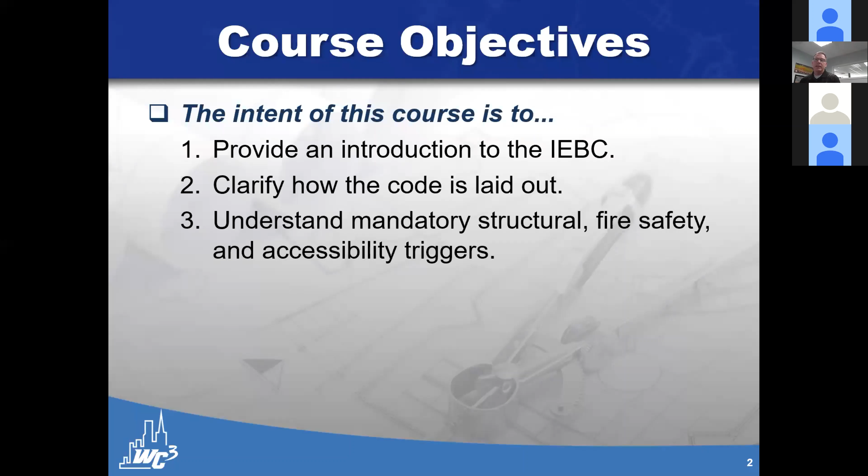There's a lot into fire safety. That even includes means of egress, and a lot of accessibility triggers. And I know Todd earlier today talked about accessibility requirements for existing buildings.

Okay, so we're going to go through 7 different topics if we have the opportunity to. We'll first do a brief introduction of the IEBC. Then we'll cover chapters 1 through 3, which are kind of the general chapters associated with all paths. Then we'll discuss the repair requirements of the code. We'll go into the prescriptive path, the work area path, and then the performance path outlined in the IEBC. And then we'll talk about relocated structures. That'll give you a really good feel for what's going on in the IEBC.

First of all, I have this picture. When you drive throughout the United States, you see a lot of older towns where the main street looks just like this. In general, these are not the ideal type of buildings that we would be building nowadays, right? Especially if you're in a high seismic region, where these are very heavy, brittle structures. If these are brick or unreinforced masonry construction, and now you have seismic ground motions, they're not going to react well to that. Or even in areas of high wind, when you have these tall brick parapets or things that might fall down on somebody in these heavy wind events.

Same thing with chimneys. So throughout the US, we have a lot of existing buildings that are really neat. We like to see them, we like to look at them, but in truth, a lot of them are dangerous. How can we keep these, but also make sure that it's not going to be too exorbitant for the owner? Where can we find a middle ground for life safety?

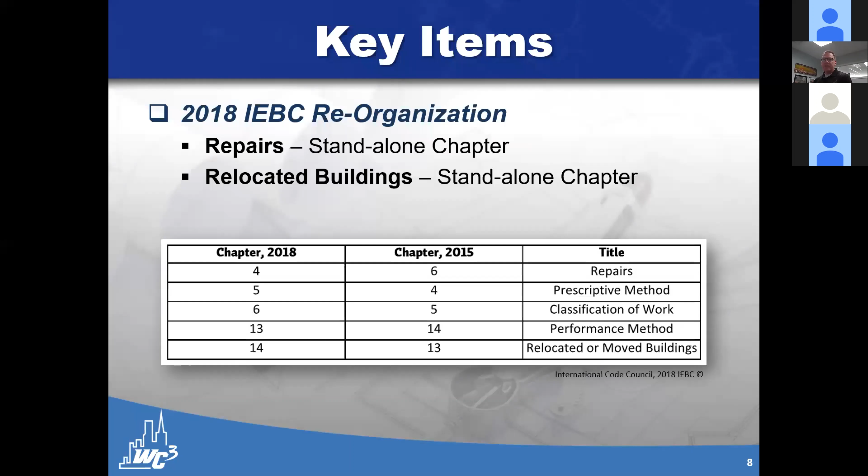I really like this. They give you an outline right away and tell you how it's broken out. Repairs is Chapter 4. The prescriptive path is in Chapter 5. Work area is Chapters 6 through 12, which is really the majority of the IEBC. Then you have the performance path in Chapter 13.

So I have a question here. It says, does the IEBC also pair with the IRC? Yes, it does. In fact, the problem with the IRC is right at the beginning of the residential code, it tells you that it applies to additions, alterations, or repairs made to a single family residence or townhouse. But it says you can't make it, you can't cause a dangerous condition or cause it to not be in compliance.

The problem with the residential code is it doesn't tell you what you can and can't do in relation to doing an addition so that you're not causing harm to that existing building, whereas the IEBC walks you through that. It tells you that if you're going to do this addition, you can't add any more than this amount of load to an existing element or something like that. So the IRC is supposed to be a standalone code, and you can use it if you're just doing additions or alterations to a residential building, but you may want to delve into the IEBC.

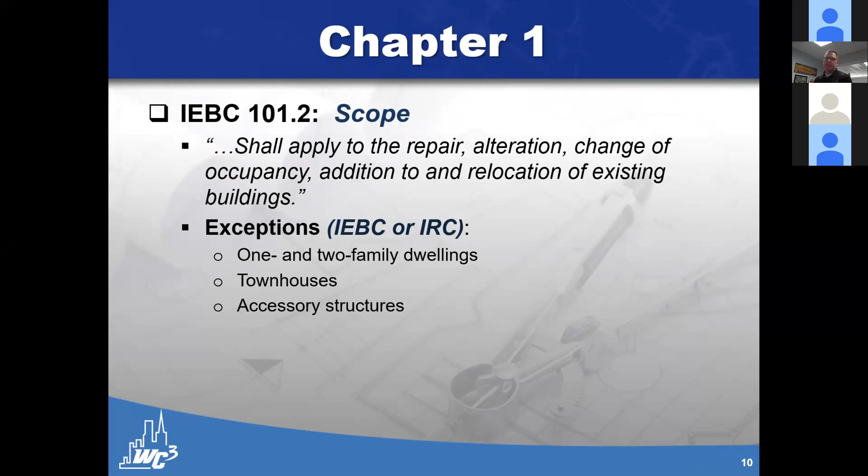Duties and powers of the building official. A couple of things are really important for us to understand: it's not new construction, these are existing buildings. All throughout the IEBC, it's going to talk about whether or not the building is located within a flood hazard area. This is one of those areas where if you have that 100-year storm event, or better said, a 1% chance of exceedance that floodwaters might come up to your floor area, wherever that base flood elevation is.

If you're going to flood that existing building at all during that 100-year event, you are located within a flood hazard area. If the work you're doing to this existing building constitutes a substantial improvement, the building official is the one that makes that determination, and they're the ones that can tell you. We're going to dig into that a little more, but it's a really important item with existing buildings. A lot of times they were allowed to build in certain areas, but now the flood hazard areas, our flood insurance rate maps have totally changed. What wasn't in the 100-year floodplain now is. So we really have to pay a lot of caution when we're dealing with existing buildings in flood areas.

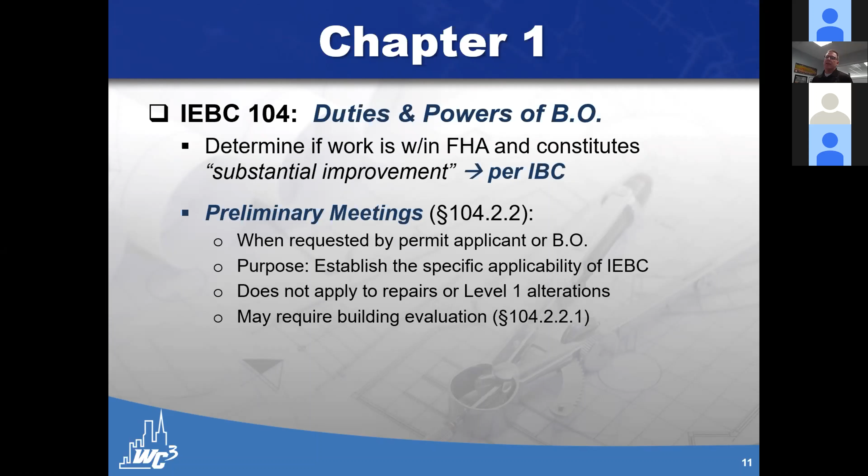Another thing they talk about is preliminary meetings. The IEBC highly recommends this, that you as a designer and the building official get together and discuss these projects before you submit to seek a permit, because they might give you other directions or things that could, hopefully not kill a project, but lead you in a different direction than you were initially planning. You wouldn't do that if you're doing a re-roof, but if you're doing a significant alteration, addition, or change of use to a building, you really may want to think about setting up a preliminary meeting.

Okay, then construction documents. The IBC has this, but we have a little bit different language in the IEBC we should think about. So the building code says that when we're dealing with construction documents, these are submittal documents consisting of construction documents - plans and specs, statement of special inspections, a geotechnical report, and other data shall be submitted.

Well, the IEBC is just a little different. It's still construction documents, but then it says special inspection and structural observation programs, investigation and evaluation reports and other data shall be submitted in 2 or more sets. So first, it adds the requirement of structural observations.

In the building code, structural observations are only typically required by the engineer of record when you have a very tall building, a high-rise, 75 feet or more, right? If you have a risk category 3 or a 4 building, or if it's something that the building official or somebody would require because it's a complicated building or whatnot.

Well, because we don't always know what we're getting into with existing buildings, the IEBC kind of recommends and encourages us to have structural observations done by the engineer of record on a project to ensure that those are constructed appropriately, that what they assumed is still what's found in the field.

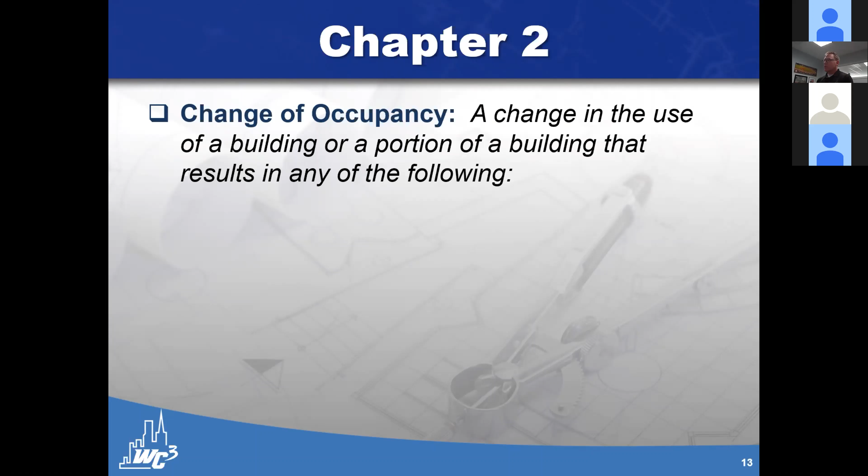So it's when you're going to change the use of a building, or just a portion of that building, that could result in one of the following. We're changing the occupancy classification - let's say it was an S2 storage, now we're going to an assembly A3 church. Now we're going to change from one group to another group in the same occupancy classification - so before it was an F2, and now I'm going to go to an F1, and F1 is a higher hazard.

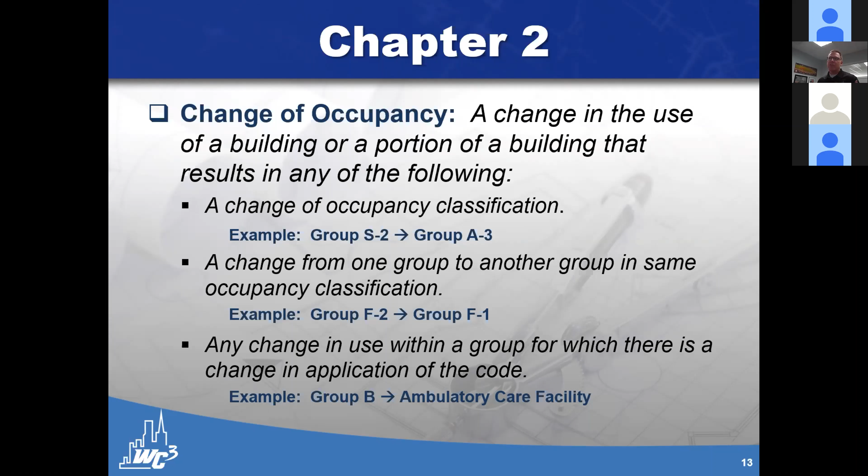Any change in use within a group for which there is a change in application of the code. Just an example, let's say I have a group B occupancy - well, it's going to be an ambulatory care facility. It still is a group B, but now there's a lot of other things in the code that could come into play. I'm thinking a lot of electrical provisions specifically that you're going to have to comply with for an ambulatory care that you wouldn't have to for a typical office building. So all of those could be a change of occupancy. It's just not going from an S to an A - it's within the same occupancy group, but a different classification, or even it could be its own classification if you have some additional code requirements that could come into play.

Flood hazard area, we already talked about this, our 100-year event. Substantial damage - this is a big one. So if the cost of restoring that building after a flood event exceeds 50% of the cost of that building before the damage occurred, then that's considered substantial damage. And they cannot simply repair it. They now need to make sure they're making that building comply with the flood provisions of either the IRC or the IBC - you know, getting up above the base flood elevation, other items, flood proofing, things like that.

Similar to substantial damage, there's the term substantial improvement. This is when the improvements you're making exceed 50% of the market value. That may cause you to bring an existing building up, raise it above the base flood elevation. Again, this is still related only if you're in a flood hazard area. There's a couple of exceptions - essentially they really limit, so you don't have to deal with a lot of finishes or things like that.

Very good question - how do you determine market value? It is totally up to the purview of the building official. That's why you may want to do one of these preliminary meetings. I believe FEMA has a substantial damage estimator, SDE, so if it's based on damage and not just improvement, you can use that. But really it's up to you to show the building official what you feel the value of the structure was before your improvement or before the damage, and then what the cost is of the work to be done. It's up to the building official to make the determination whether or not you've hit substantial, or 50%.

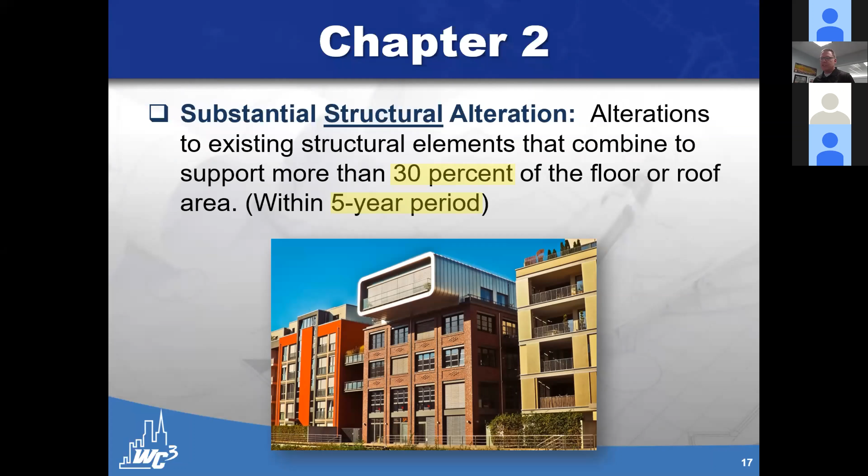Technically infeasible - this is one item I'm sure Todd talked about in accessibility earlier today. This is an accessibility trigger only, where it gets you exceptions, so you can get out of it. So if we have our bearing walls right here, if we have to meet a minimum egress width for our path of travel, now this bathroom that we have cannot be expanded anymore without significant hardship. So that's going to be technically infeasible to make that an accessible bathroom or to improve it to meet current accessibility provisions.

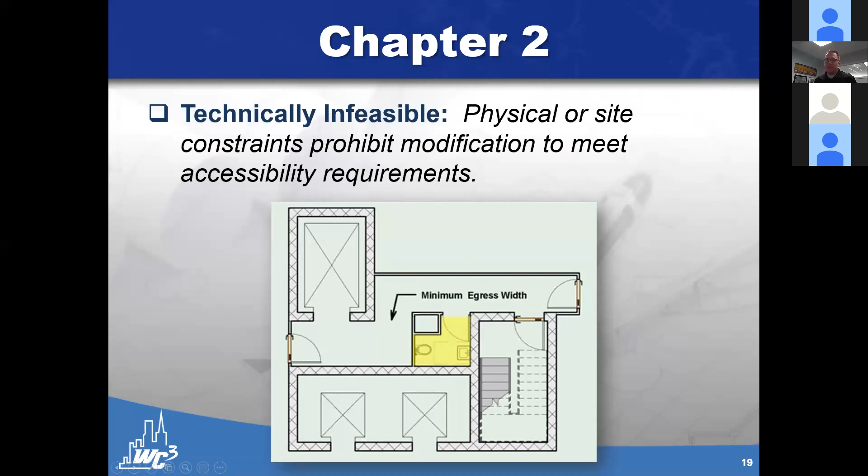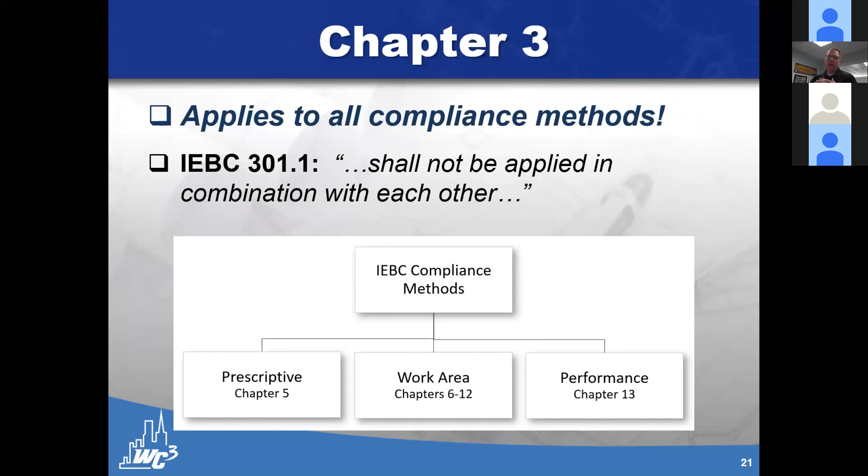Okay, chapter 3 - this applies to all of our compliance methods. We have the prescriptive in chapter 5, work area 6 through 12, and then performance chapter 13. You need to remember this: you cannot combine them together. You can't, as an architect, choose to follow the prescriptive path while the structural engineer of record follows the work area path, and then the mechanical guy wants to do the performance path. You all, as a design team, have to stick to the same path - you can't mix and match.

Anytime we're dealing with the International Existing Building Code, any dangerous conditions can be called out at any time by the building official and need to be remedied. I wish this was more clear - those of you familiar with the Uniform Code for Abatement of Dangerous Buildings that we used to have, that was much more clear in relation to dangerous conditions than the IEBC is. But the building official can cause them to be repaired at any time.

Similar to the IEBC being a companion code to the building code, it also says you need to make sure you're in compliance with the energy conservation code, the fire code. One thing for sure is the property maintenance code comes into play quite a bit and is referenced throughout the IEBC. And existing materials can always remain unless they are found to be unsafe. So if you have asbestos, lead-based paint, mercury, those sorts of things, and you're doing work within those areas, you're going to have to make sure you're meeting the health department and other EPA regulations to comply with that.

All new materials that you're going to be using in general should comply with the requirements for new construction, which is the building code. But sometimes like materials are allowed in the IEBC, so you can use like materials if that's all that's triggered, regardless of new construction requirements. All new structural elements that you're adding, and their connections, have to meet current requirements in the building code.

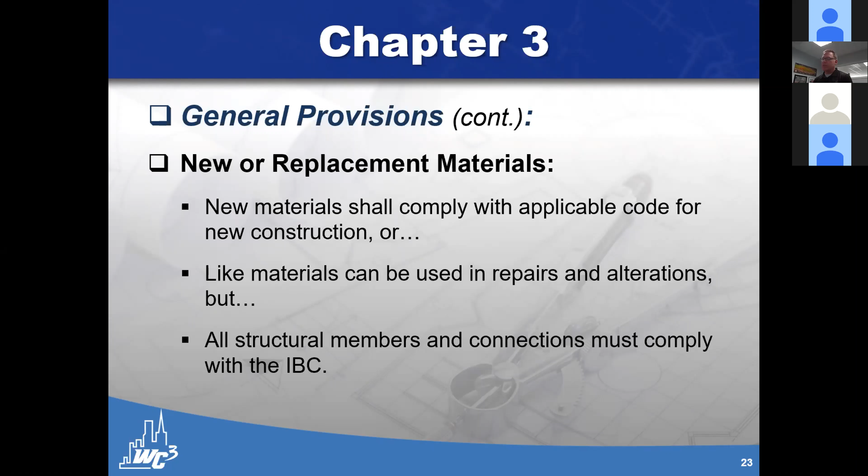303 is a really important section. This covers a lot of the triggers throughout the IEBC that address when you may require a structural evaluation. Remember the difference in Chapter 1 as far as construction documents to the building official when you're seeking a permit—a lot of times an evaluation report may be required. There are three different sections we're going to talk about on these structural evaluations: live loads, snow loads, and lateral or seismic.

As far as live loads, if you're going to do an alteration or an addition to an existing building, and the live loads do not change, you just need to make sure everything's in compliance with the loads during the original construction. Now if you're increasing the live loads, you need to show you're meeting the requirements of 1607 in the IBC. So if I take a residence and now make it into an office, before I had a live load of 40 pounds per square foot, now I have 50 pounds per square foot—I need to make sure that works. The third option is if it's a lesser live load, the building official can approve a lesser live load.

So why would you ever do that? Let's say I allow somebody to purchase a single family residence and convert it over to an insurance office. Let's say we know there's really not going to be more than 2 people in that office, plus maybe two clients—so 4 total people. I can see that it wouldn't really require an increase from the 40 PSF, and you could allow that as a building official. But if you allow it, then they need to placard that and note it.

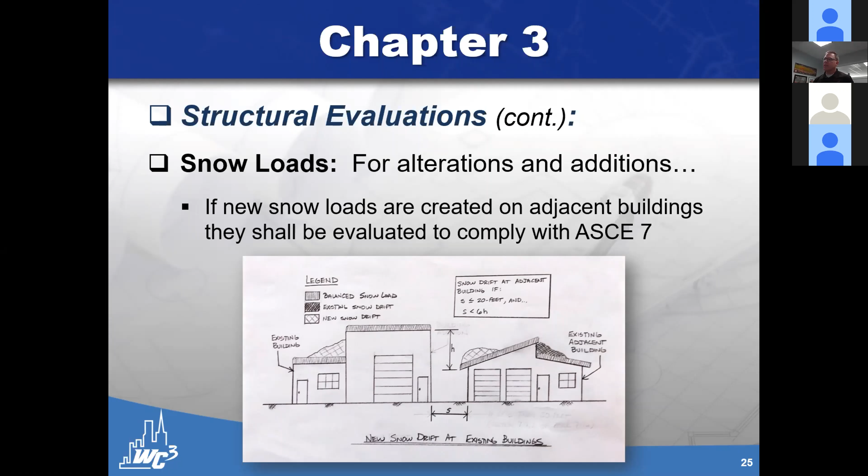So we may have to require an evaluation of the roof system of that adjacent property as well. That's highlighted and noted in the IEBC. Not a fun one, but hopefully you're dealing with more property and you're not built right up next to each other like that. Be aware of how additions can also affect snow requirements on that same building or adjacent properties.

Okay, seismic. This is a big one. This is where a lot of the triggers are in Nevada. You definitely have a lot of seismic considerations, and a lot of these triggers will come into play whether you're in northern Nevada or southern Nevada. You all have to deal with it.

Really, this is going to reference two different documents: the building code or ASCE 41, which is for the seismic evaluation and retrofit of existing buildings. That's what the structural engineer of record oftentimes will use if it's a pretty complicated existing building. Throughout the IEBC, they're going to tell you whether or not you have triggered a full seismic requirement or a reduced seismic.

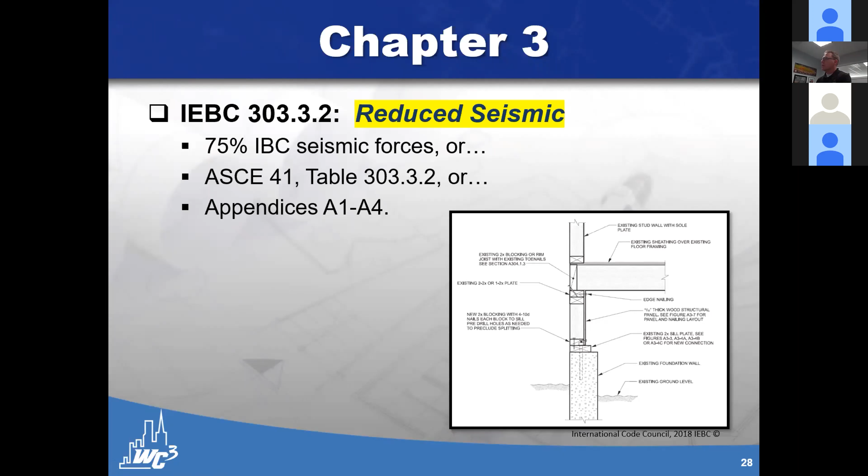All right, so that was the structural evaluations. Now, before accessibility - before the 2018 IEBC, all the accessibility provisions were mixed throughout. They were in the prescriptive path, they were in the work area path. They weren't in the performance path because it kicked you back to the IEBC for that requirement.

But now, in relation to existing buildings, accessibility is all covered in section 305. So that's probably, as you deal with existing buildings, a section you're going to want to tab. That's a section you're going to, as an architect, be referring to quite often - section 305 of the IEBC.

In general, it's requiring us to be in compliance with A117.1, the 2009 version. But it also has additional provisions for maintenance, change of occupancy, additions, alterations, and change in existing buildings. It has provisions for historic buildings. I know Todd went over some things today, but I'm not sure if he covered the IEBC references. Just as the IBC provides scoping provisions, we have revised scoping provisions for existing buildings within section 305.

First, let's assume for accessibility purposes we're dealing with a change of occupancy. For a change of use, we need to make sure we have an accessible building entrance, an accessible route from the entrance to our primary function area. Accessibility signage has to be provided throughout. Accessible parking and passenger loading zones have to be provided, and we have to have an accessible route from that accessible parking to our accessible entrance.

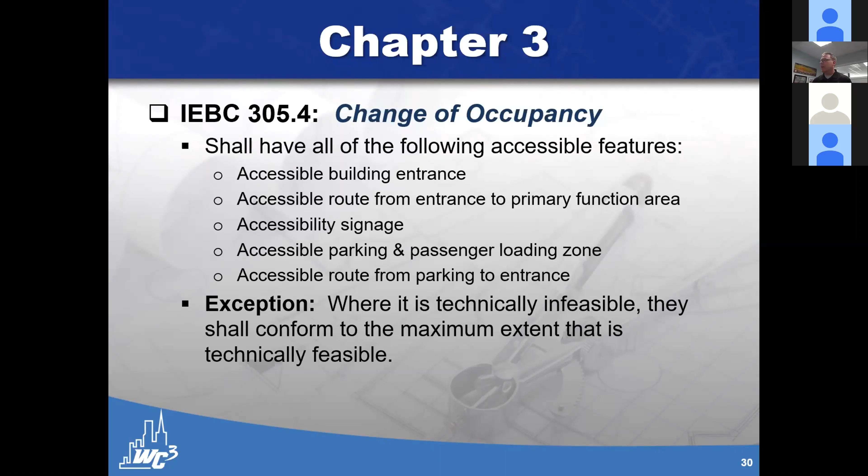Things like that. Now additions are a little different. The addition itself, obviously I would hope, has to comply with the accessibility provisions of the IBC, so new construction requirements for the addition. Now if our addition actually alters part of our primary function area, then we're going to have to also make sure we're providing accessibility to those primary function areas.

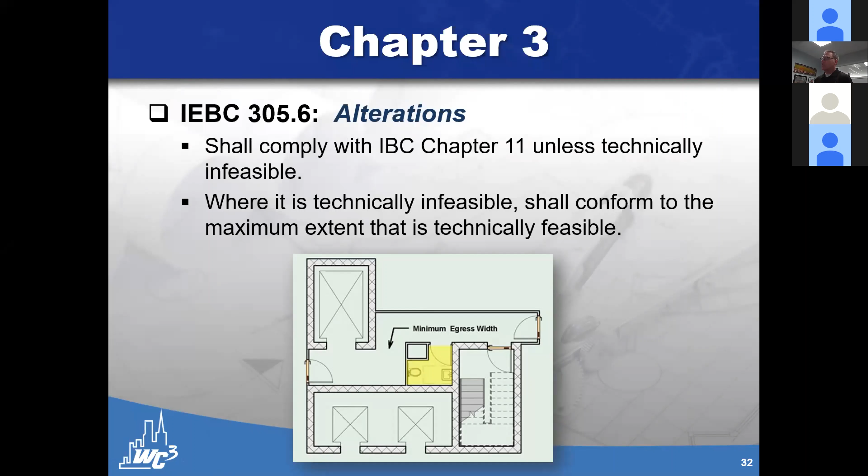Alterations need to comply with Chapter 11 for the work, unless it is technically infeasible. So we get that definition back in, and if it is technically infeasible, we still have to comply to the fullest extent possible. Now when we're dealing with our primary function area, if we have an addition or alteration that is affecting our primary function areas within the existing space of a building, we need to make sure we have an accessible route to that primary function area. And with that accessible route, we also need to make sure we have proper accessible toilet facilities and drinking fountains. That's only if our alteration or addition affects primary function areas within the existing space.

I did hear Todd mention earlier the 20% cost. Just so you know, that 20% trigger, this exception, is only limited to the primary function area items you have. If you're doing a change of use, the only trigger you have is technically infeasible - you can't pull out the 20% cost burden. That only applies to additions or alterations where you have to make sure you have an accessible route to the primary function areas. In that case, you can pull out this 20% cost of the alterations.

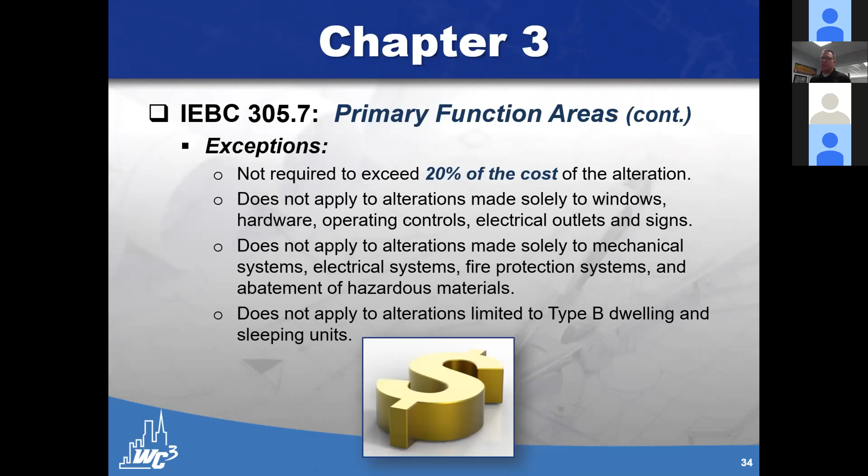There's a lot of scoping provisions provided throughout 305 - items for entrances, elevators, all these different items, amusement rides. We can't go into them all. Just know that they're typically a little less stringent than what you would have in the IBC for new construction, but if you have any of those elements, you do have to comply.

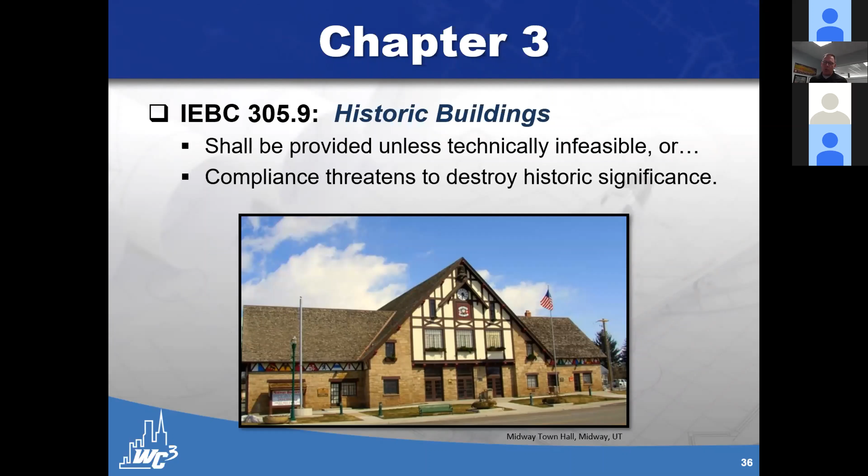Now in relation to historic buildings, in general they say you need to provide accessibility unless it's technically infeasible, or if you can show that the compliance threatens to destroy the historic fabric of that building. This is the general rule - now, this is from the ADAG website, but a couple of things you're supposed to have: at least one accessible route from an arrival point to an accessible entrance. This looks like the main entrance. The main entrance does not have to be accessible for a historic building.

So this one they make accessible, and we have to have an accessible route to that entrance. You have to have at least one toilet room - it could be a family assisted toilet room. So those are really the accessibility provisions they have for historic buildings in 305.9.

Okay, so now let's move on. We went over the general provisions. Let's dig into repairs - again, this has its own chapter now, this is Chapter 4 of the IEBC. You don't get to follow prescriptive work area or any of that. You have to deal with repairs in Chapter 4.

You cannot make any building less conforming if substantial damage did occur and you're in a flood hazard area. You need to make sure that building is brought up above the base flood elevation. You're designing it to comply with the requirements for the IBC or the IRC.

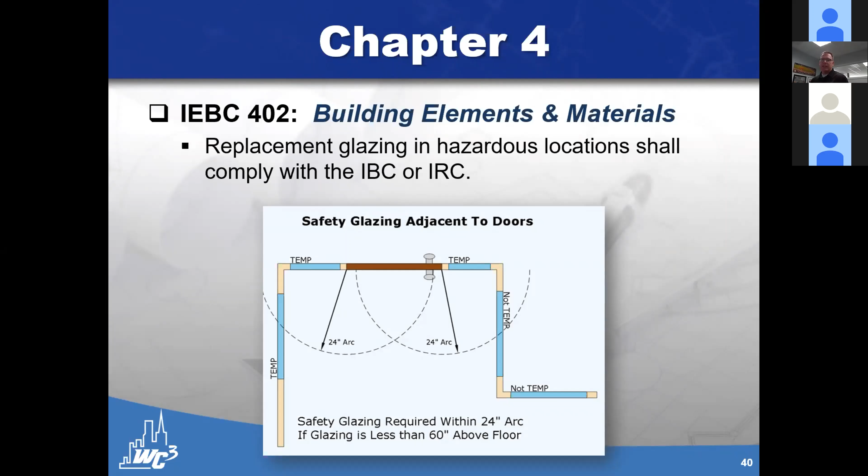Anytime you're going to replace glazing, and that glazing is located within a hazardous location, most of you are aware of where that might be, near wet surfaces, next to doors, things like that. We need to make sure we have the appropriate glazing in those hazardous locations, not replacing in kind.

In relation to structural repairs, as long as the damage that occurred that you're repairing is less than substantial, you can repair it to its pre-damage state.

Now, if it's substantial structural damage, which we already defined, and it's very significant - that was the one where we talked about 2 gravity triggers or our lateral trigger - they need to give us an evaluation, considering all of this, but it can be reduced seismic when they do their evaluation.

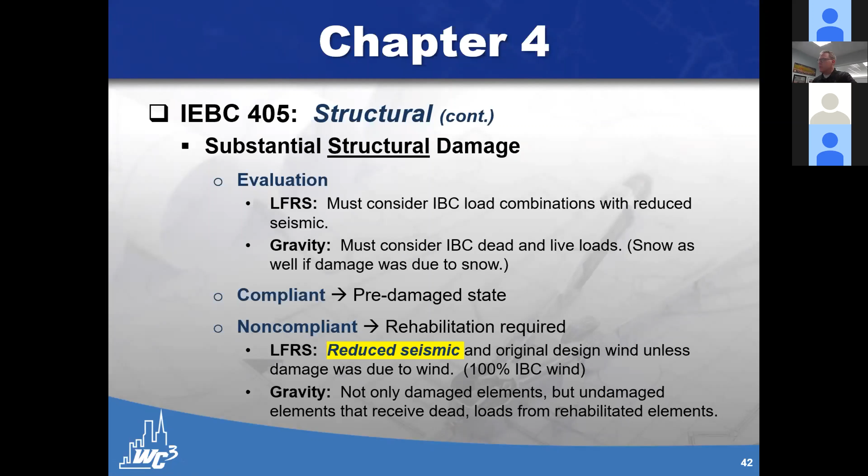If their evaluation shows that it is a compliant building, they can then restore it to its pre-damage state. If they show that it's non-compliant, they're going to have to upgrade the building to make sure it's able to withstand 100% wind, the reduced seismic, 75% IBC seismic, all the gravity loads, things like that.

Again, we already talked about the flood hazard area, so I'll skip that. Other things when we're doing repairs, there's just a couple of electrical items we should be aware of.

You can, in general, replace with like material, but receptacles have to comply with 406 of the electric code. Grounding type, GFCI, AFCI, tamper resistant - those types of receptacles need to be installed. And if they have the Edison base type plug fuses, if you can see any tampering or overfusing that's done, they need to replace those fuses.

If you're in an I2 occupancy and it has non-hospital grade receptacles, they all need to be upgraded to hospital grade receptacles. And if we have appliances that aren't grounded, we need to make sure that we somehow are able to ground those elements.

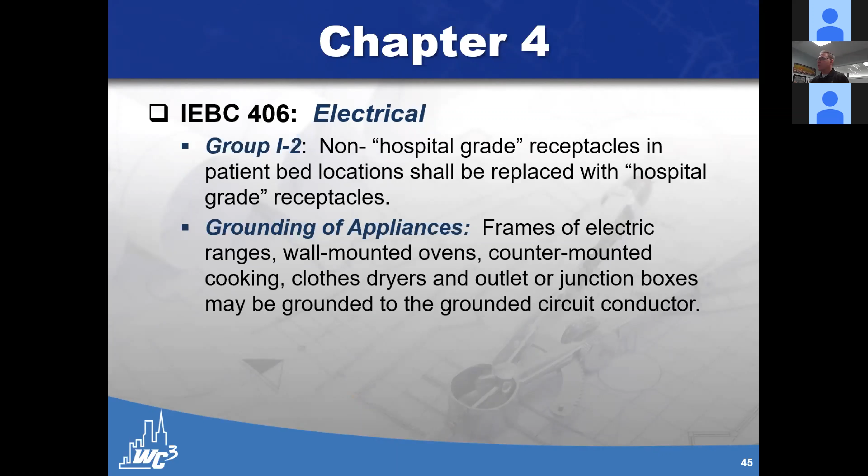Mechanical draft systems is the main thing that really comes into play here. If you're going to install one, you need to make sure it's listed. It needs to have visible, audible warning provided, smoke detection, battery backup - those sorts of things need to be provided with that. So if you're going to add a gas fireplace within a master bedroom or something that wasn't there before, you need to make sure these items are addressed.

In relation to plumbing, it's really no big deal. You just have to make sure you can replace with like kind materials as long as they're not prohibited by the plumbing code. And when you're going to replace a toilet or a water closet, you need to make sure it's an efficiency toilet, which pretty well they all are now - it's hard to get one that doesn't meet these code provisions.

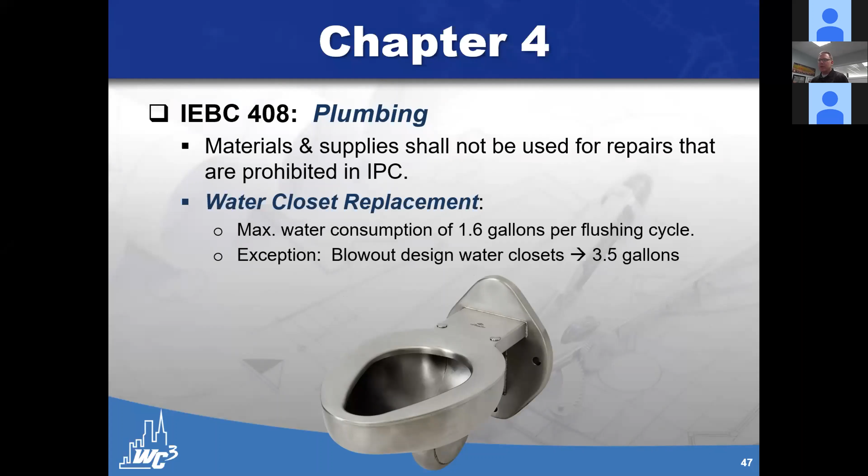Okay, so that's just the repair section. It's pretty easy. Now, the prescriptive path - this is what I've always called the Betty Crocker, the cookbook. This is the one that really walks us through what we used to know.

Most of us have been in this industry for a while. We were very familiar with Chapter 34 of the Building Code. Now, really, that is gone - that was taken out, 2012 was the last year. And those provisions really are what we have now in Chapter 5 of the IEBC. It's very, very similar.

The one thing about this is there are some exceptions. Bleachers and grandstands need to follow a separate standard created by ICC. Again, we can't mix our paths once we're following this. We need to stick to prescriptive all the way through.

If we're going to do an addition to an existing building, the addition itself has to comply with the building code, we've talked about that. Alterations to the existing building need to make sure that the existing building is no less in compliance than it was prior to that addition. Sometimes, from a structural perspective, if you do an addition, it may cause a reentrant corner or a structural irregularity, and that needs to be addressed. So that's really what they're after there.

You need to make sure that this addition, combined with the existing portion of the building, has not exceeded your allowable heights, area, and story provisions of Chapter 5 in the building code.

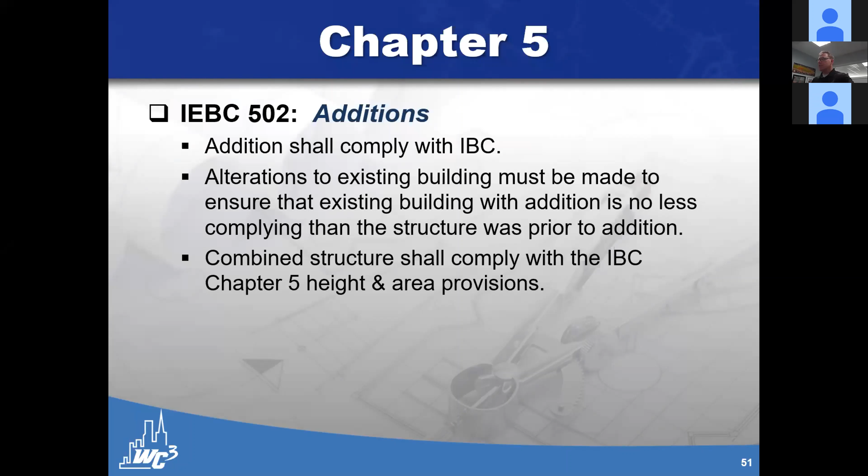Whoops, I was on the wrong picture showing that to you guys, I apologize, I have 3 screens going and it was on the wrong screen. So if it's less than substantial, just the addition needs to be raised. If it is substantial, now the existing building and the addition need to be raised to be above the base flood elevation. Sorry about that.

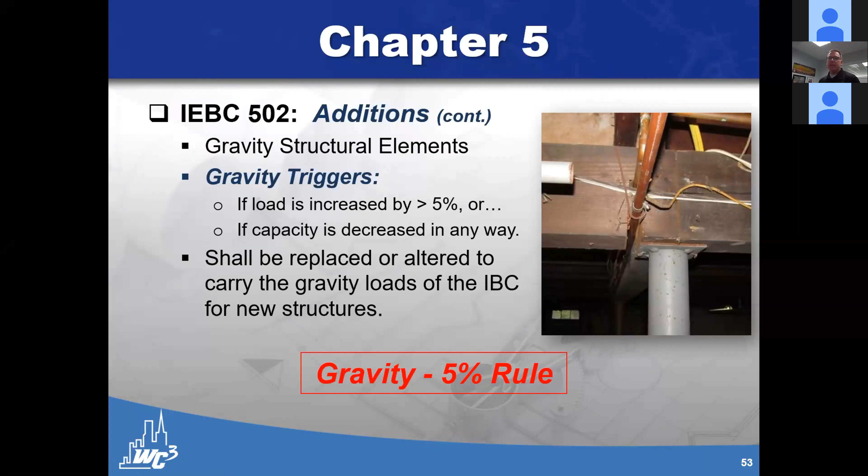For gravity, it's the 5% rule. In general, am I adding more than 5% load to an existing gravity element, or have I decreased its capacity in any way? I hope you would all know that somebody came through here and definitely decreased the capacity of this element, all right? So that needs to be either altered, replaced, or repaired to make sure it can meet and support the current building code load criteria.

The lateral trigger is 10%. So if you're going to be attaching this addition to the existing building, sometimes we don't, sometimes we have a gap between them. But if you're going to be attaching them, you cannot increase more than 10% lateral load to that element, or decrease its capacity by 10%. So the lateral is a 10% rule, the gravity is a 5% rule.

Now the 5% rule is associated with just that gravity element, but the 10% rule is for the building as a whole. Once you've triggered this requirement, you can't just, let's say I cut out a lot of a shear wall, I can't just strengthen that shear wall. I now have to evaluate the entire building.

The reason that trigger is there is it allows the opportunity for the building official to make sure these buildings are safe. This trigger, if you hit the 10% rule lateral for doing an addition, it's full seismic, 100% IBC, as we talked about in 303 of the IEBC.

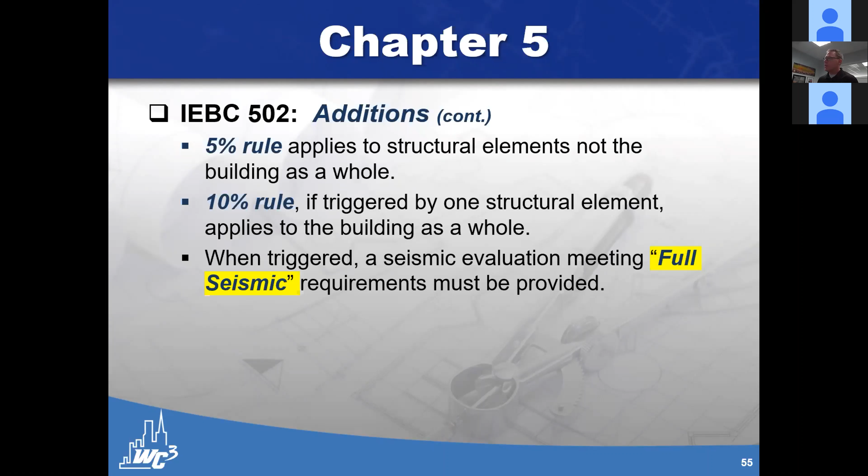Here's the way out. Let's say you have an existing building, it's unreinforced masonry, we have 2 wythes of brick, rubble foundation. It would have cost too much to upgrade it all. So we have a seismic gap between the two, eccentric footing, and so we just tell them this is now designed to meet 100% code requirements. We tell the owner, you feel any shaking, run to the addition, and that's what you do. But that is an allowance. If you can make the addition structurally independent, then you haven't triggered a requirement to upgrade the existing building.

This is just to go over it a little bit. Here we have an existing building. What they're going to do is an addition, they want to add a kitchen and then a covered patio. So now I have this new roof area, and I take half of that and take it over here.

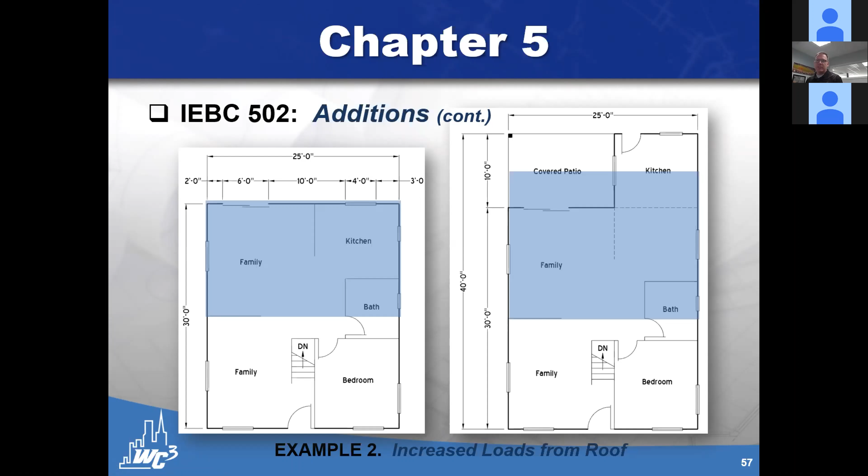So this bearing wall right here is now supporting more than 10%, right? Or if it's bearing, let's say gravity, 5%, but now let's call it a shear wall. More than that, I've also decreased its capacity by taking out a lot of the wall. Even though I had a window here, I took out some additional portion of that wall. I definitely hit the 5% gravity, the 10% lateral triggers. They need to do an evaluation of this entire building and show that it meets code.

Okay, prescriptive requirements. Hopefully we're all familiar with this. Anytime we're touching anything in most R or I occupancies, we may have to add smoke alarms and CO detection, required throughout group R or I1, and we need to locate them just like the fire code or building code requires.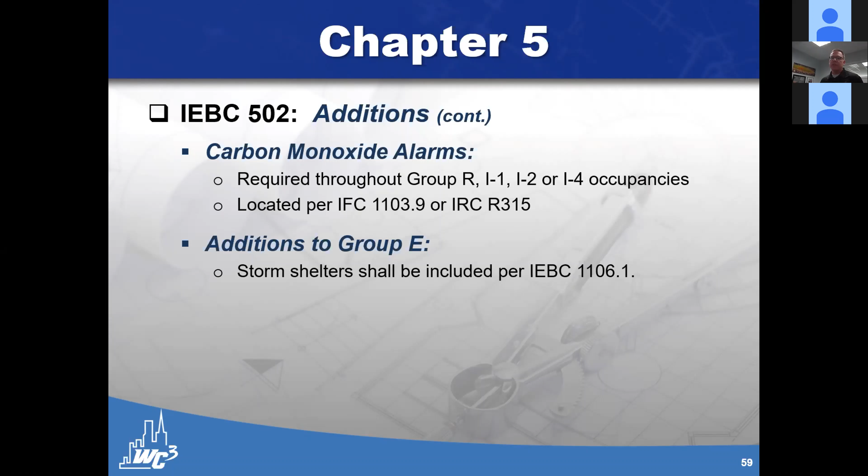Same thing with carbon monoxide detection - these apply to group R, I1, I2, and I4 occupancies. There's also a requirement in section 502 that if we have storm shelters, and we're doing an addition to a group E occupancy within an area that requires storm shelters, you need to show the existing storm shelter can handle the additional occupancy from the addition, or add a new storm shelter compliant with the building code requirements.

Okay, we have a question. So a high-rise building, over 20 floors, from the 1960s, with horizontal corridors and vertical shaft pressurization - is compliance triggered when going from transient hotel to permanent apartment?

You are changing it - going from an R1 to an R2. There's the requirement: the building official has the opportunity to state whether or not it's the same or a less hazardous occupancy in your change of use. If that's the case, a lot of the change of use triggers may not be required, but it's up to the building official to make that call. It gives the building official a lot of leeway.

So the trick is to show in your analysis, and have a preliminary meeting, to say 'we are making this less or the same level of hazard as it was previously in this change of occupancy.' In that case they might not require it, or maybe there'd be a meet-the-halfway sort of thing. That's in the change of occupancy section we'll get to, and they leave it up to the building official to meet that exception - if the change of occupancy is equal or less hazardous. That's a good question.

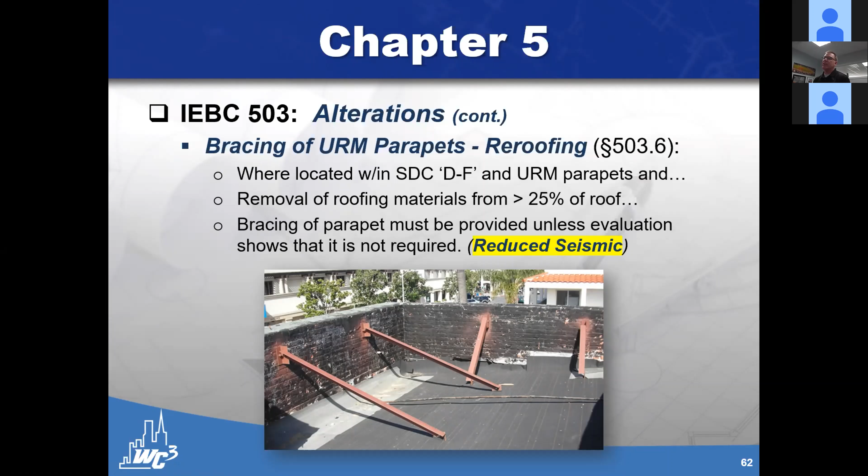If we have unreinforced masonry parapets, and you're going to be doing a re-roof at all, it requires you to brace the parapets. It does say reduced seismic - that evaluation by the engineer of record is just 75% of the IBC forces. Also, if we have a reinforced masonry or reinforced concrete building with a flexible diaphragm or wood diaphragm, they also need to evaluate the roof to wall anchorage.

As an example, one reason for this is the older tilt-ups done in the 70s - the roof-to-wall attachment was highly inadequate, and during the Northridge earthquake they found a lot of them collapsed. So that roof-to-wall connection is key to collapse prevention and holding a building together and letting people get out.

So they have this trigger: if you're going to be altering at least 50% of the area within that existing building, and it's composed of concrete or masonry walls with a wood diaphragm, then they need to evaluate the roof-to-wall connections and make sure they meet the 75% reduced seismic force level.

Similarly, if we have unreinforced masonry buildings in seismic design category C or above, and 50% of the area is being affected, they'll have to evaluate that - maybe not add the connections, but evaluate the roof to wall connections. Even if you're not doing a re-roof, if you're affecting at least 50% of the area of an existing building as part of your alteration, they require bracing of the unreinforced masonry parapets.

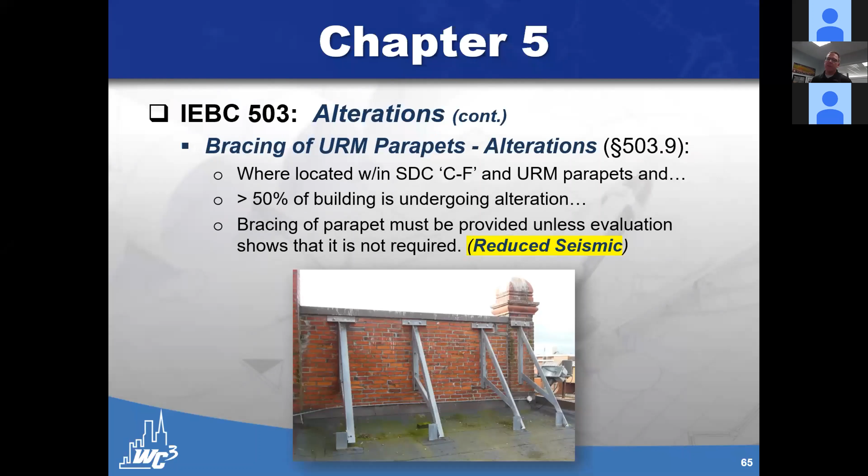A lot of times we'll see these older buildings - a lot of older school buildings have this where they're concrete frame buildings with masonry infill walls. Now there's this requirement that the masonry infill has to either be removed or reinforced to meet the reduced seismic.

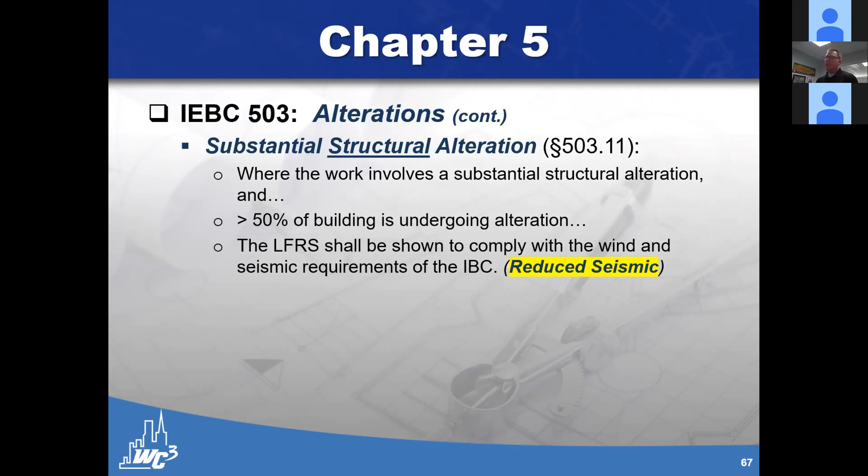Substantial structural alterations, again, that's one of the triggers we talked about earlier. Just so you know, anytime we're doing an alteration, if it triggers a seismic evaluation per 303 of the IEBC, it's always reduced seismic. If we're doing an addition and have to do an evaluation, it's always to full seismic. So additions are 100% IBC force level, while alterations are just 75%.

It's not just seismic that's covered in the existing building code, it's also wind. If you're in areas with high wind, greater than 115 miles per hour design wind speed, and you're going to replace at least 50% of your roofing materials, they require you to evaluate the diaphragm and the roof to wall connections of those buildings. Make sure you're at least meeting 75% of the wind requirements of the building code, and if not, you need to strengthen all your diaphragm connections and roof to wall connections.

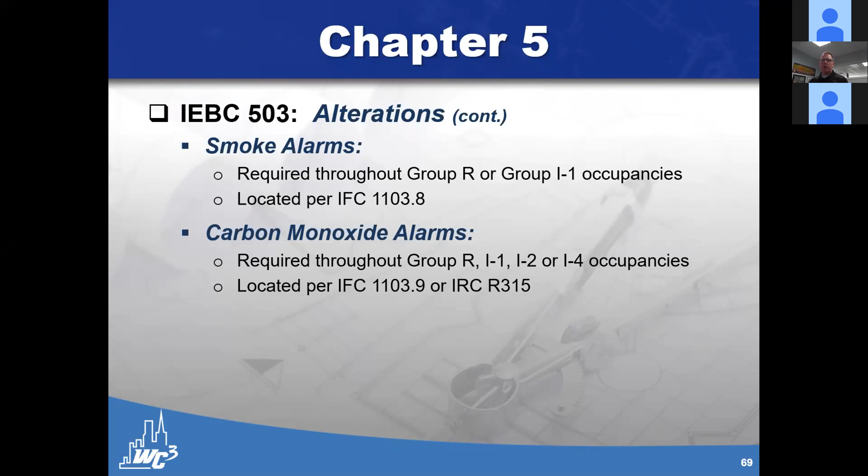Just like in repairs, we have requirements here. If we're doing alterations in a group R or I1, we need to add smoke alarms. In R, I1, I2, I4, we need to add carbon monoxide alarms. Another thing noted here is if you have existing refuge areas, any alterations you're doing need to make sure you're not affecting them so they won't comply with the requirements for smoke compartments in I1, I2, I3, ambulatory care facilities, and horizontal exits. You need to make sure they still satisfy the requirements for those uses.

Fire escapes. Obviously, this is something we do not have in the building code for new construction, but in a lot of our areas, in older Las Vegas and older Reno, you might find some older tall buildings that did have fire escapes for exits. So the IEBC addresses fire escapes and how we handle them, not the building code itself. They are not allowed in new construction, but we may still have them for existing construction, and we need to make sure we're meeting minimum criteria. The IEBC highlights some of that.

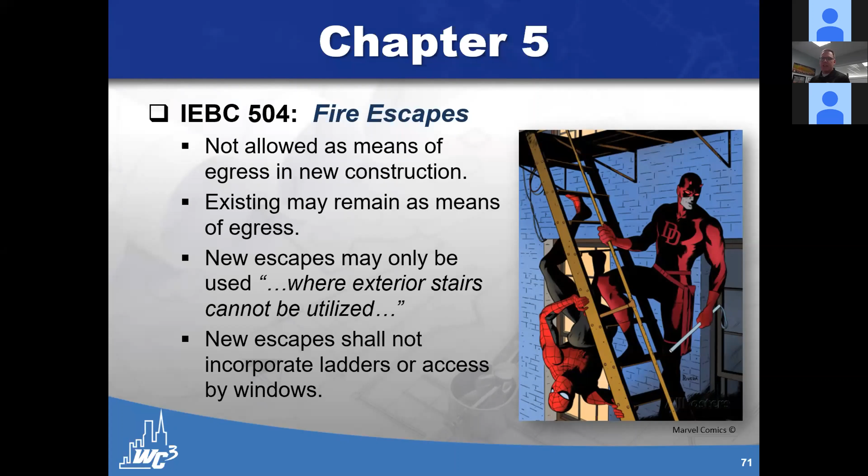And if you're doing a change of occupancy for an existing building, and you now need to have two exits, or maybe one additional exit at least from what you have available, this allows you to incorporate new fire escapes into it as part of that change of occupancy, so long as you're not exceeding 50% of your required exits being from a fire escape. There's a lot of provisions, and you can dig into it more if you want to. We won't spend much time on it here.

Now, our emergency escape and rescue openings. A lot of changes occurred in the 2018 codes you guys might be aware of, but right now there's some things I want to highlight for existing buildings. For sure, our opening control devices at our upper story windows. If it's an operable window, if the top of the sill is less than 36 inches from the floor, and the distance to grade is 72 inches or more, we need to make sure we have an opening control device that won't allow anything to pass through more than 4 inches.

Now, our replacement rescue openings. If it's an R2 or R3, it says they're exempt from the IBC or IRC requirements, provided that the replacement window is the largest size that can fit in the existing opening, and it provides for an equal or greater window opening area.

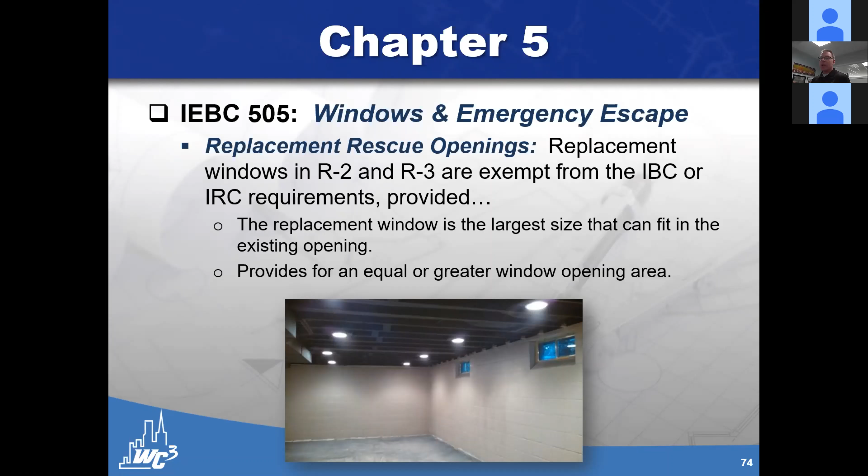I bring this up, my wife grew up and she had a basement room with windows just like this. If this was an existing space used as a bedroom, then this would apply. If now we're doing a change of occupancy within that space and altering it to be occupied as a bedroom, we do need to alter these windows to comply with the IBC or IRC requirements. Unless we meet another exception now that's there, that if you have 2 other exits out of the basement, then you may not have to have the emergency escape and rescue opening from that room itself. So that's a new provision. Not quite sure why it's there, but it's there.

Okay, now prescriptive, we're still in the prescriptive path, chapter 5, change of occupancy. So no change can happen unless that building is shown to comply with the IEBC. And this is what I was talking about before, the second bullet point. It's up to the building official to note whether or not that occupancy is the same or less hazardous from a fire and life safety risk perspective.

So it's really up to them, and it's up to you to provide that argument early on in the process. So less hazardous, and I think you could definitely say that, going from an R1 to an R2 in the scenario we talked about before.

Anytime we have a change of occupancy, the building official has to issue a certificate of occupancy. Stairs are not required to comply with the requirements of the IBC where the existing space and construction does not allow a reduction in pitch or slope. So it's kind of going back to our accessibility technically infeasible term or definition.

When we hit our triggers for a change of occupancy, it makes us go to full seismic. Live loads have to conform with the IBC. Snow and wind loads, if you haven't changed anything, you're good.

If we go to a different risk category—let's say before it was a warehouse and now it's going to be a church—now we've made it a risk category 3 building in all likelihood. We now need to show in our evaluation as part of that change of occupancy that we meet all snow, wind, and seismic requirements to show that they meet the full IBC requirements.

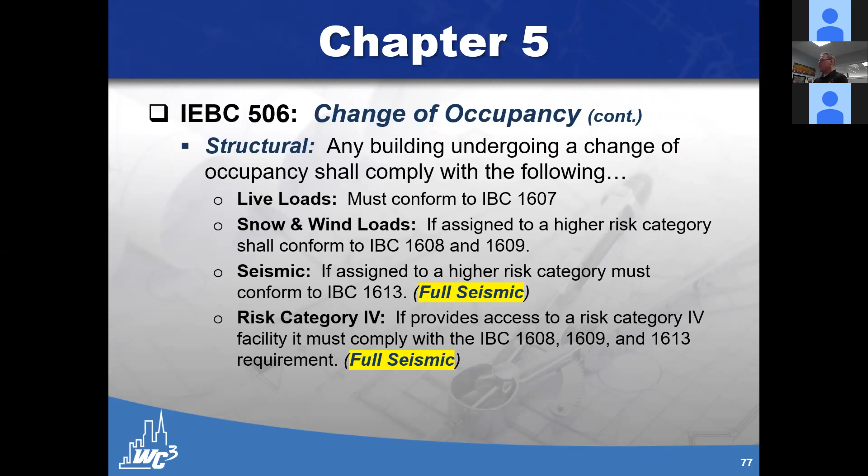Historic buildings, following the prescriptive approach, are not required to meet the provisions of this, provided that the building official deems there's not a distinct life safety risk.

I will highlight right now, again, there's three paths you can go. The way the prescriptive path addresses historic buildings, I do not like at all as a code official, because it puts all the onus on the code official. Whereas if we go into the work area path, which we'll talk about in a little bit, it actually requires...

...the design team and the owner to put together an evaluation of that historic building to note what items they are not in conformance with from a life safety perspective, why those items may not be able to be addressed in order to keep the historic fabric of the building, and then there's supposed to be a meeting of the minds with the building official. In this instance, the code doesn't really say that you have to have this evaluation with the design team and discuss it. I really like the evaluation.

So, okay, that's the prescriptive path. We went over all that. We've gone over repairs, we've gone over the prescriptive approach, and now let's talk about the work area method. Again, this is chapters 6 through 12. I'm going to probably be skipping some slides a lot because there's a lot of repetition from the prescriptive path.

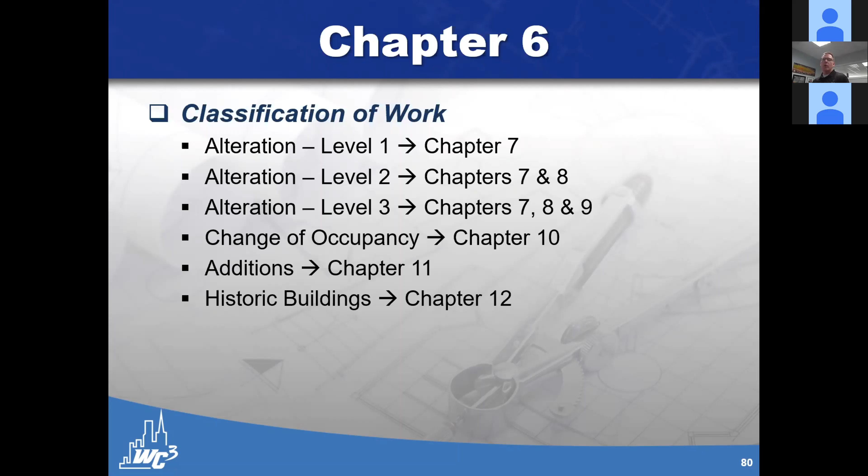Right away, chapter 6 just tells you how they break it out: chapter 7 will talk about alteration level 1, chapter 8 level 2 alterations, chapter 9 level 3 alterations. They just break it out. In general, alterations are given different categories.

A level 1 alteration is if we're going to remove or replace any existing equipment, add a new roof covering, replace the roof, or a re-roof permit—really, really minor items.

Alteration level 2, now we're going to start to reconfigure the space a bit. We might cut some new door openings or window openings, add some equipment rather than replace existing equipment—we're going to add equipment now.

Level 3 is a lot bigger. Not only are we reconfiguring the space, we're probably reconfiguring 50% or more of the entire building there, the aggregate building area. So chapter 7, we're doing level 1 alterations, probably a lot of re-roof stuff.

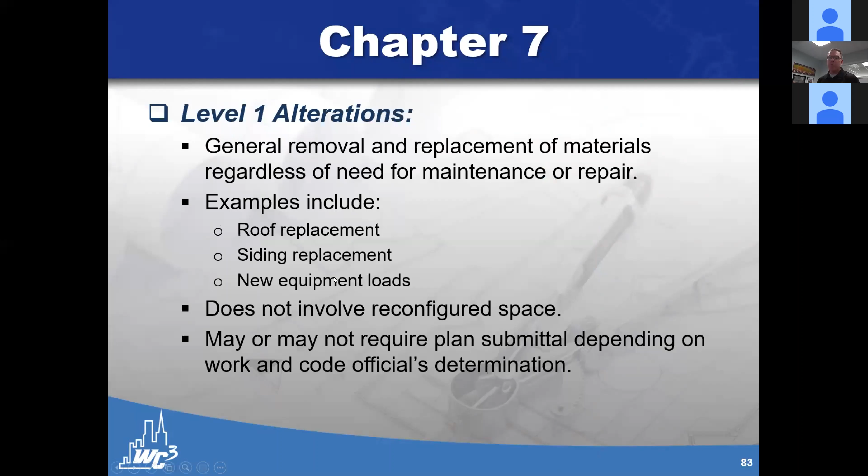So roof replacement, siding—my slide says new equipment loads, but that's not the case, it's replacement equipment, not new. So we shouldn't be seeing things like this, right?

It goes through all the requirements we have in the building code, that depending upon the type of materials, how many layers of roofing we can have. A roof replacement per the IEBC means we're replacing all the existing layers of roofing—we're down to the roof deck.

A roof recover is we're now going to be putting new roofing materials over existing roofing materials. They allow you in the IEBC to do that as long as the new roofing is installed per the manufacturer requirements—you have a complete and separate roofing system that does not rely on the existing roof for support.

So a standing seam metal roof could do that. There's specific provisions for metal panel or concrete clay tile that are installed over shake roofs, and that's just to make sure that we're not creating a fire hazard there. So 705.4 of the IEBC discusses that.

Also, there's a new protective roof coating sometimes that you can apply, even if you're following all of these. If it's a soaked roof, if you have dangerous materials, things like that, you should not be doing a roof recover.

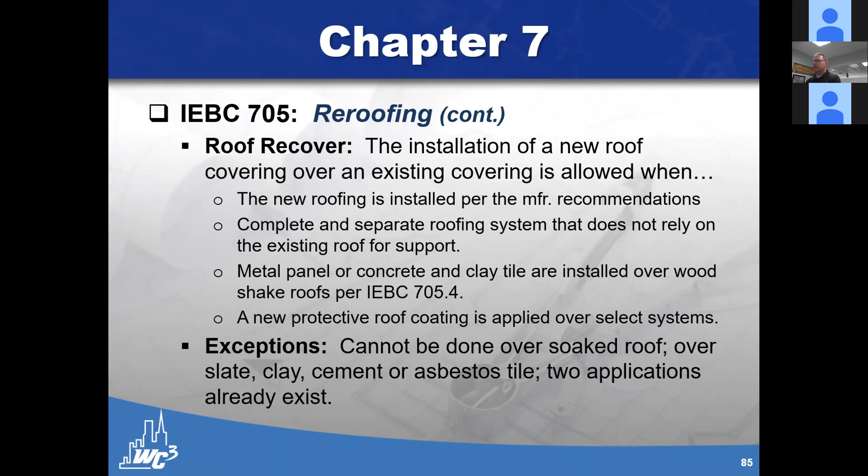One thing I didn't say there, just know that with the re-roof, some of the triggers we talked about under the prescriptive still apply. We may have to have our URM parapet bracing. We may need to, in high wind regions, reinforce or evaluate our roof diaphragm and roof to wall connections.

Now, level 2 alterations are going to be getting a little more involved. We're going to now reconfigure the space. Once it's a level 2, we have to comply with Chapter 7 and Chapter 8, both together, okay?

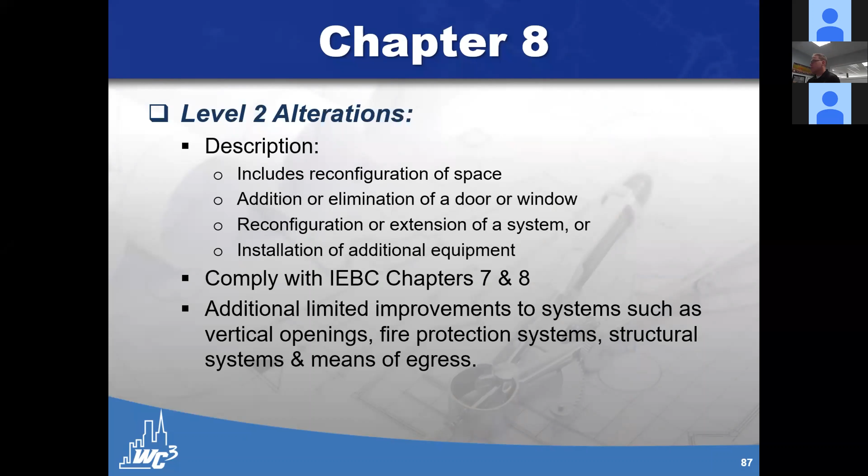There are some requirements they have for vertical openings, fire protection systems, things like that come into play with this. So your existing vertical openings - I'm going to first freak you out a little bit. Existing openings connecting 2 or more floor levels shall be enclosed with 1 hour fire rated construction.

With that said, with the code, we always have exceptions, and there's 14 exceptions, and a lot of times you can get out of this. That's really the general default that they want you to do, and it's up to you to determine whether or not you meet one of those 14 exceptions.

If you're affecting a work area of greater than 50%, it really should be a level 3 alteration. And enclosure requirements for the vertical openings, it does definitely come into play.

Smoke compartments. So when we're dealing with I2 occupancies, if you have more than 30 patients on a story, you have to make sure you're dividing it into no less than 2 compartments by means of smoke barriers.

Guards - you have to make sure you're providing guards at every area where you have a 30-inch drop or more. Existing guards are fine even if they're not in compliance height-wise, but if they're structurally unsound, if they're going to fail pretty shortly, then you do need to replace those guards. And once you replace them, you need to make sure they're in compliance with current code provisions.

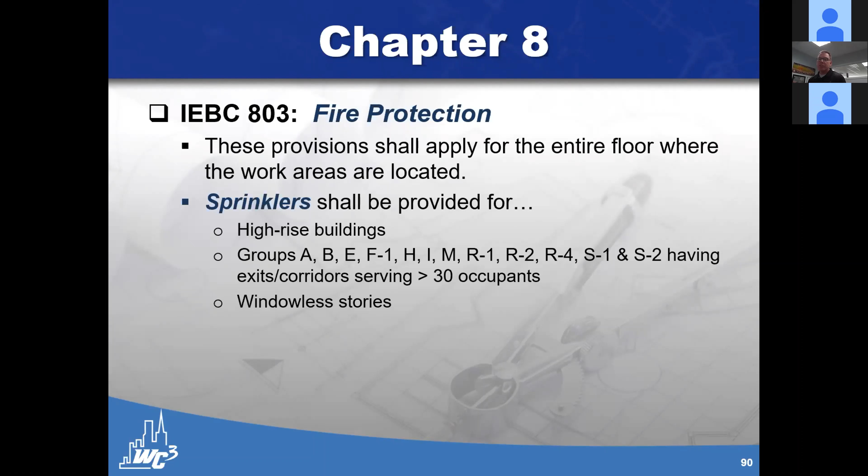If you're a group A, B, all of these, and you have exits or corridors that are serving greater than 30 occupants, we need to make sure we have sprinkler protection. If we have windowless stories, we need to make sure we have sprinkler protection.

Now, standpipes - whereas the building code tells us we need to have standpipes within all new buildings that have an occupiable floor level that's 30 feet or more above the lowest level of fire department access, the IEBC says 50 feet. So we have an occupiable floor of 50 feet above the lowest level of fire department access.

So if it does not have an existing standpipe system, we need to add it if we have floors above 50 feet. Those standpipe connections now need to be provided at each level. They have to be installed in accordance with the IBC and of course, the IFC, which is a duplicate.

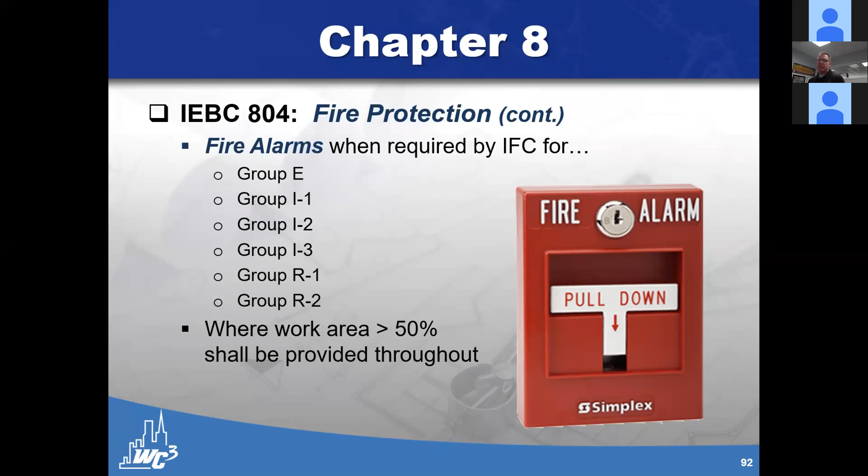Fire alarms. So anytime the fire code would require them for a group E, I1, I2, I3, R1, or R2 occupancy, we need to now provide them for these existing buildings that we're performing level 2 alterations in. If you are affecting a work area of greater than 50%, that fire alarm system now has to occupy the entire floor level.

Okay, fire protection systems - so we're still in that. Smoke alarms have to be provided throughout our R and our I1, carbon monoxide alarms in our R's and our I1, I2, I4. Same as what we've talked about before under the prescriptive approach and the repairs.

Means of egress. This only gets triggered when you're dealing with 2 occupants, 2 tenants or more within the work area that you are altering. So it only applies to that work area. There are some times that you might trigger some things within 805 that would require you now to do the entire floor area as well.

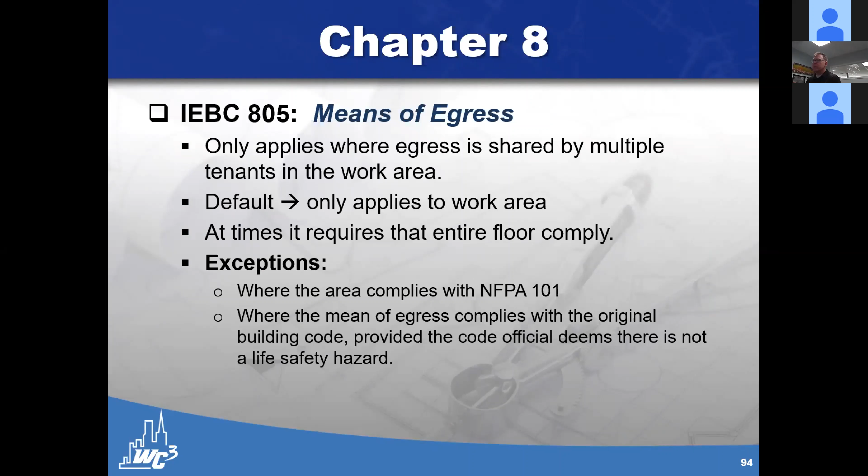Number of exits have to comply with the IBC, but when there's more than one tenant, and based on the occupants you have, they'll go through and tell you whether or not you can get by with one exit. It's going to be a little different than the provisions that we have.

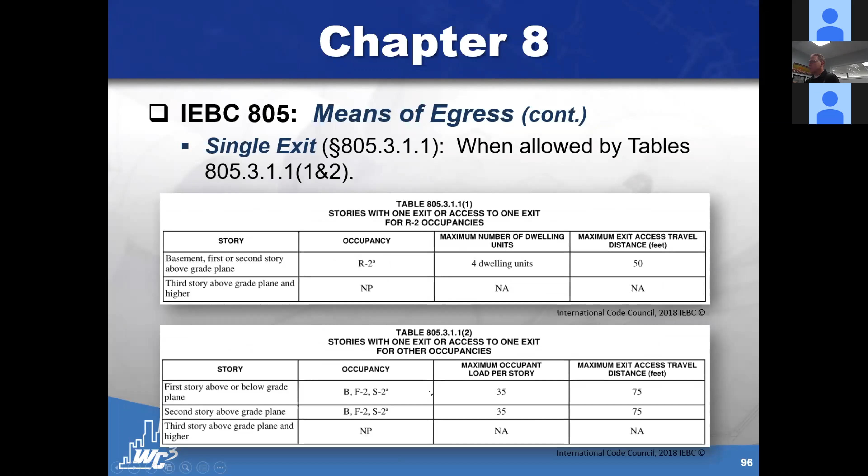Now these are the provisions that they also include in the IEBC. So for an R2 occupancy, we have B, F2, and S2. They're a little less stringent than what we'd have in the IBC requirements.

Fire escapes, we already discussed fire escapes and what that is. New fire escapes can be installed.

Mezzanines. Now we have a lot of new mezzanine provisions in both the building code and the IEBC. Two exits are required when you have more than 50 occupants on that mezzanine level, or the travel distance exceeds 75 feet.

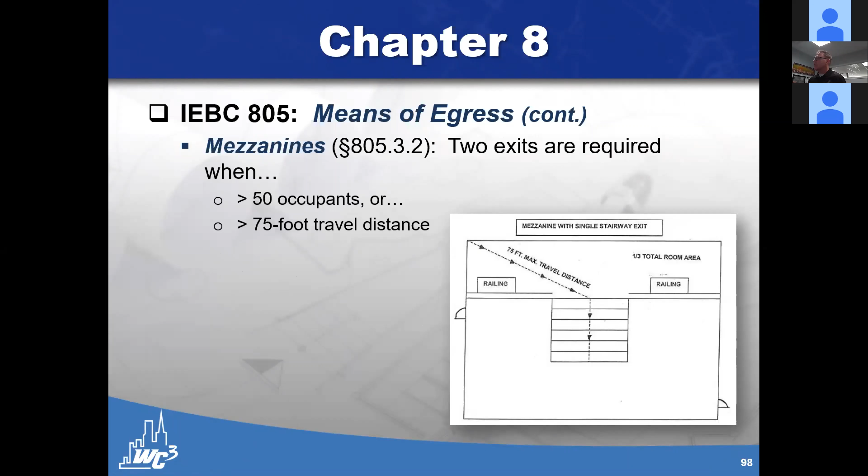Or if we have a group A with our main entrance, when you're serving an occupant load of 300 or more, that main entrance must be capable of serving at least half of the occupant load. I think we all understand that - that's what people are most comfortable with and where they're most likely to return to, so 50%.

Our egress doorways - at least two are required if you have greater than 50 occupants or greater than 75-foot travel distance. And in our I2 patient sleeping rooms where the suites are greater than 1,000 square feet, your door swing, door closing, panic hardware, all that has to comply with the building code requirements.

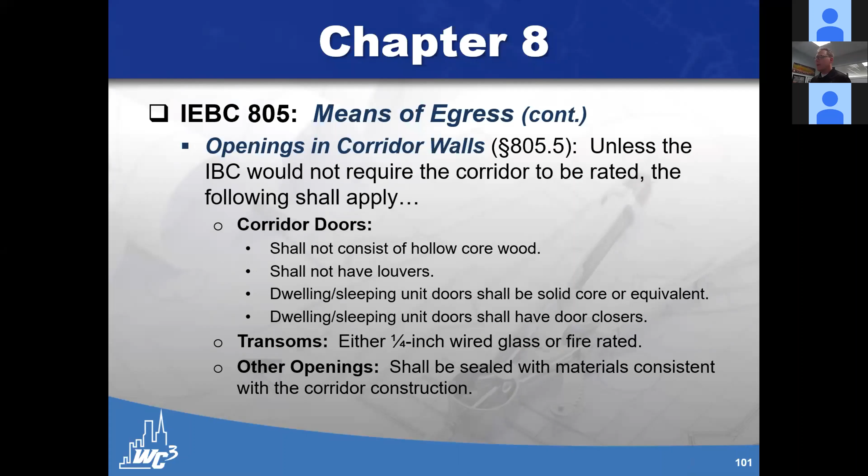Now, if we have existing openings in corridor walls, unless the IBC would not require that corridor to be rated, we need to make sure those penetrations, those openings, are compliant. So corridor doors cannot consist of hollow core, cannot have louvers or transoms. You have to make sure we have appropriate fire rating, and any other openings need to be sealed and meet all the penetration limitations in Chapter 7 of the IBC.

Means of egress lighting has to be provided. If it's greater than 50% of the floor area, you have to do it throughout that entire floor level. Artificial lighting has to be provided per the IBC. Dead end corridors cannot exceed 35 feet.

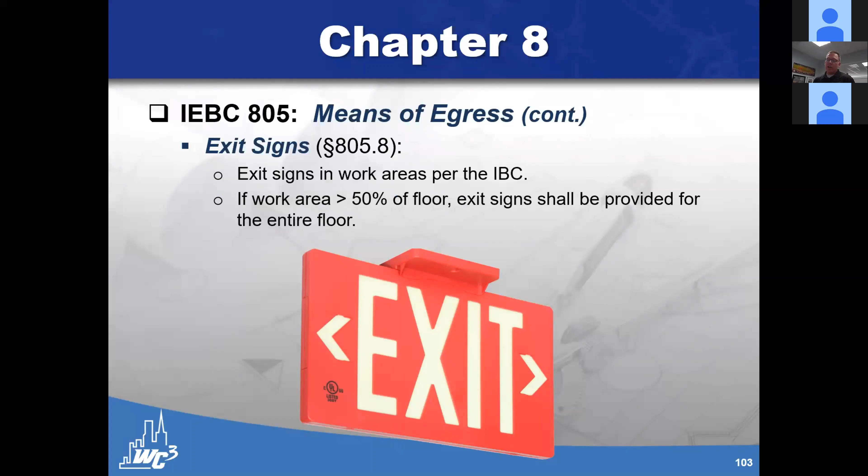Now exit signs - we want to make sure exit signs are being provided throughout the space that we are altering, wherever the IBC would require them. And if we're altering more than 50% of the floor, that entire floor level needs them.

Handrails will have to be provided - anytime you have greater than 2 risers, one handrail has to be provided. If it's greater than 66 inches in width, you need one on each side. Guards - we already went over guards, the exact same provisions there. An existing guard can remain unless it's structurally inadequate.

Okay, electrical, this is a big one. New installations all have to meet the current NEC provisions. If you're doing wiring within an A1, A2, A5, H, or I occupancy, they have to be upgraded to current NEC provisions. If it's an R2, R3, or R4, they also need to meet the provisions of 807.3 - receptacle requirements for GFCI, arc fault protection, things like that. So those have to be met as well.

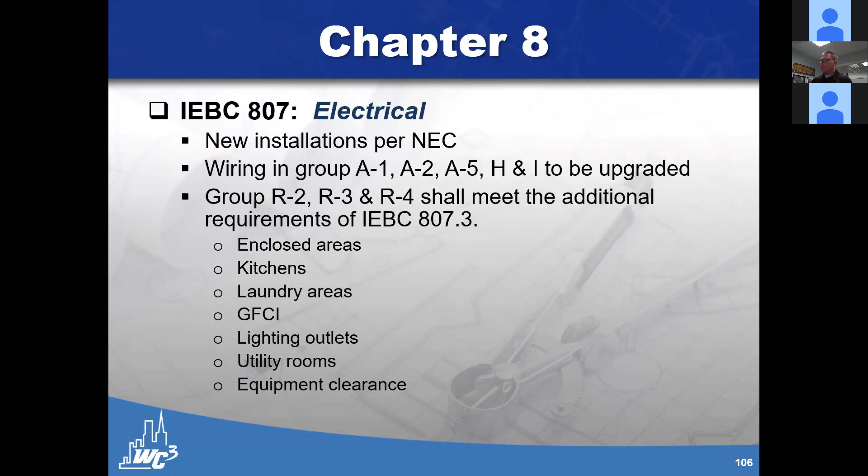So level 2 alterations, mechanical: we just need to make sure we have natural or mechanical ventilation that meets the requirements of the mechanical code. Here I'm referencing the IMC - I know I've already done that in the past, and I know throughout most of Nevada you're using the UMC and the UPC.

The only time plumbing comes into play is if that alteration may cause an increase in the occupant load of more than 20%. If it's more than 20%, you need to show that all the plumbing meets the requirements of the adopted plumbing code.

Energy - the alterations only, not the entire building, have to meet the energy conservation requirements.

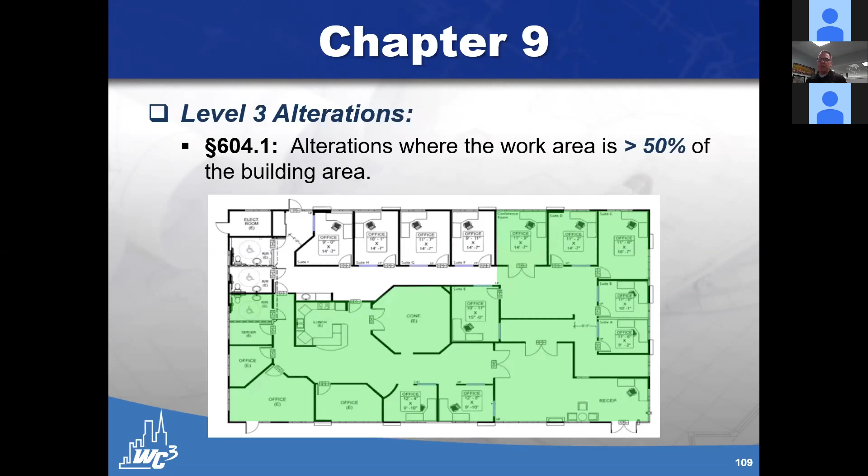Okay, level 3 alterations. So we're gutting this building, doing a lot of work, right? It has to be more than 50% of the work area of that building, so it's going to be very significant. We are now required to comply with Chapter 7, Chapter 8, and Chapter 9.

Now, if they're high-rise buildings, we need to make sure we have recirculating air or exhaust systems with smoke and heat detection if they're pushing more than 15,000 CFM.

At least one elevator is going to have to meet the emergency operation requirements of ASME A17.3. And then in our boiler and furnace rooms, if they're adjacent to an I1, I2, I4, R1, R2, or R4, they need to be enclosed by 1 hour rated construction.

Existing shafts and all existing stairways that are part of the means of egress are required to be enclosed for level 3 alterations.

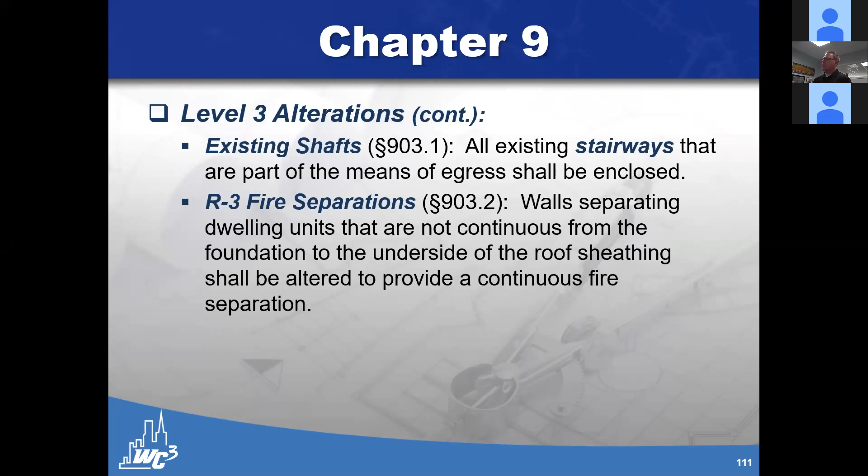R3 fire separations, if they're not continuous from the foundation to the underside of the roof sheathing, shall be altered to provide a continuous fire separation. So in our townhomes, things like that.

Fire protection, now sprinklers. If we have more than one tenant and the building is serving an occupant load of more than 30 people, we have high-rise buildings, rubbish and linen chutes, upholstered furniture or mattresses, that's when we need to make sure we have fire suppression there.

It also says when required by IBC table 903.2.11.6. This is just a small snapshot of that table. Very good to be familiar with that table and see if fire suppression may need to be addressed because you have one of those uses within the space and it was not pre-treated. Even if it was existing, now that alteration is triggering the requirement to make sure that fire suppression is provided.

Fire alarms. So we need to make sure we have manual alarms and notification appliances as would be required by the IEBC. Automatic fire detection has to be provided throughout the work area. Means of egress, we have to have our means of egress lighting, our exit signs, all of that throughout the work area space.

And energy, again, it's the same. It's just the items, the alterations and things that you're doing. The entire building does not have to comply. It's just the altered area that does.

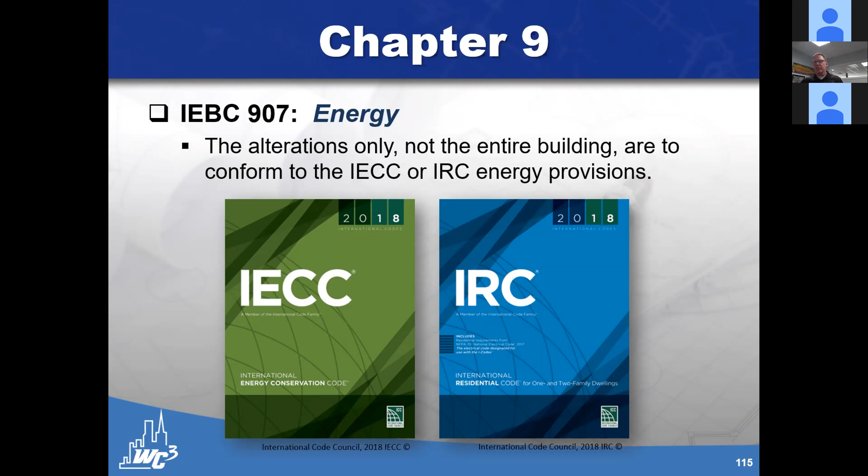Okay, no more questions. I probably lost you all. This is a lot of talking, a lot of slides that we're going through, so I apologize.

Chapter 10, our change of occupancy that we might have within the building. When the change of use is changed to one of the following, the building itself shall fully comply with the IBC. So regardless of all the other things we're going to talk about in Chapter 10 under the work area path.

If you have atriums, you have to comply with the IBC. If you have motor vehicle related occupancies, you have to comply with the IBC. So if you have one of these uses, just be aware of that.

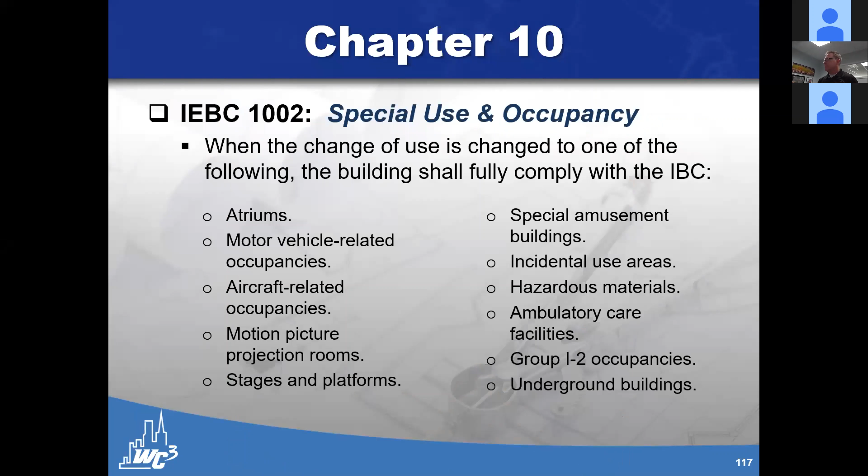Okay, electrical. Any type of special occupancy we have within the building that could have one of these: hazardous locations, commercial garages, aircraft hangars, gas dispensing facilities, bulk storage plants, spray applications, healthcare facilities. There's a lot of different hazards that come into play with these types of uses that are specifically called out in the NEC.

And so if you're doing a change of occupancy and one of those is going to be there, your electrical provisions are going to need to be brought up to meet current NEC requirements. All unsafe conditions have to be addressed in relation to that change of occupancy that's occurred as far as the electrical goes. You have to have a service upgrade that complies with the NEC for the new occupancy.

The electrical outlets have to comply with the NEC within the portion of the building where the occupancy has been changed. We know most of you are probably well aware of all the receptacle requirements that we have within residential occupancies. So if you're going to be revising it, you need to make sure you're meeting the spacing requirements, that the right receptacles are being specified.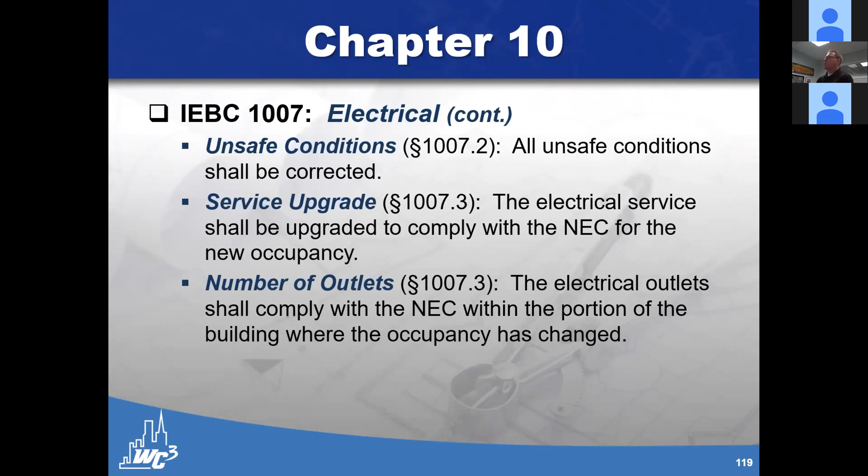As far as mechanical, your kitchen exhaust, mechanical ventilation, all of that stuff is going to have to comply with the mechanical code. Typically the UMC in Nevada, but I know a lot of you also allow the IMC as an alternate means.

Plumbing. If we have an increased demand based on this new change of occupancy that we have, or an increase to the water supply demands, we need to make sure that we're complying with the current plumbing code requirements. If it's a food handling occupancy that we're changing this to, all existing sanitary waste lines near the food preparation or storage areas have to be panned or protected in accordance with the plumbing code.

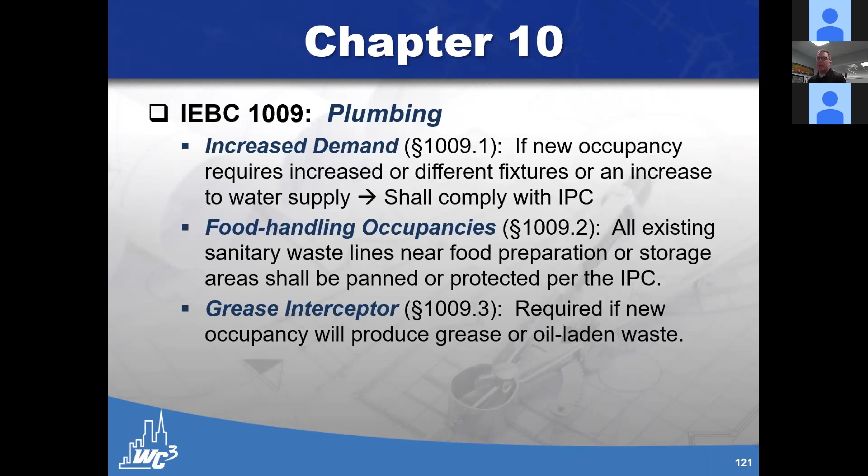Grease interceptors, if it's a new occupancy that will produce grease or oil-laden waste, we need to make sure we're meeting the grease interceptor requirements of the plumbing code.

Now chemical waste. A lot of times we might have a new occupancy that will produce chemical waste. A lot of reviews I've done in Nevada, I've done several of the extraction facilities. Right now we have the growth facilities and the extraction facilities, and a lot of times they're combined. A lot of these might be producing chemical waste as part of their growing and extraction processes. They need to show that all the existing piping not compatible with the waste is going to either be neutralized, or they'll have to change the piping system to show it's not going to be a detriment. And then they need to show that it's not going to discharge to the public sewer.

If it's a Group I-2, all plumbing needs to conform with the current plumbing code requirements.

Our lighting and ventilation has to comply with the IBC for the new occupancy. For non-separated occupancies, if fire barriers complying with IBC Table 508.4 are not provided to separate the occupancy, the entire building has to comply with Chapter 9 of the IEBC.

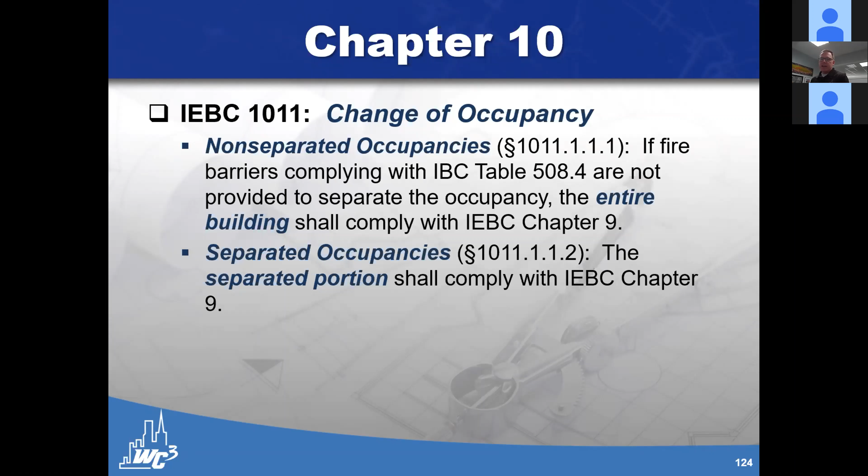So that was our Level 3 alterations that we talked about. Now for separated occupancies, just the separated portion has to comply with Chapter 9. If IBC Chapter 9 would require sprinkler suppression or protection for the new occupancy, then we have to have fire suppression there. Same thing - if IBC Chapter 9 or IFC Chapter 9 requires fire alarms throughout that space, based on that new occupancy, we have to provide fire alarms there.

So that's one argument you can make with the building official going from a hotel to an apartment building - if you're looking at Chapter 10 of the IEBC and the different hazard category tables, we have not increased the hazard at all as part of this change of occupancy. If it's equal to or lower, you can just make sure you're meeting the means of egress requirements of Chapter 9 Level 3 alterations that we talked about. If it's a newly constructed egress element, it has to comply with the IBC. If you've increased the hazard level, you have to make sure you comply with the means of egress provisions of IBC Chapter 10.

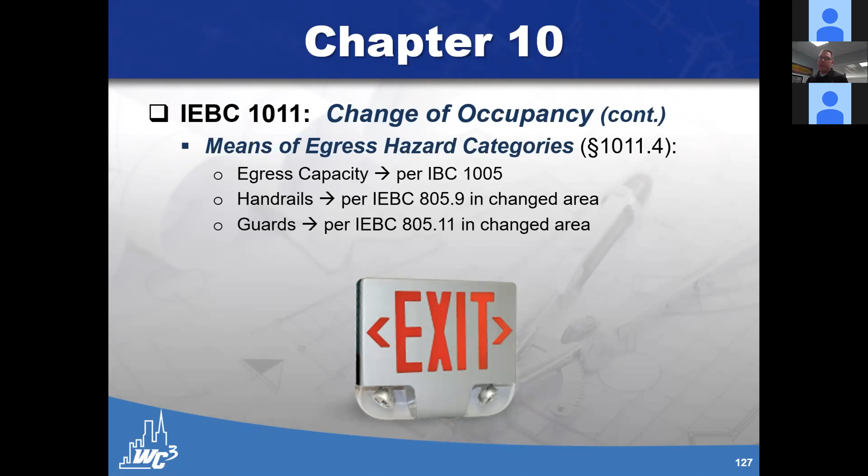So this is the firewall alternative. A lot of times we're used to firewalls that, in order to meet the Chapter 5 provisions for allowable heights and area, we add to buildings so we can make a larger building and have more occupants, breaking them up between those spaces. Well, they do allow a firewall alternative in the IEBC - they allow you to install fire barriers or horizontal assemblies in lieu of an actual firewall. You can't do this in Group H, F-1, or S-1 occupancies. The entire building has to be sprinklered - typically it's the type of building that would be anyhow. The maximum allowable area on either side of that firewall cannot exceed the values in Chapter 5 of the IBC, assuming you have it without the sprinkler increase.

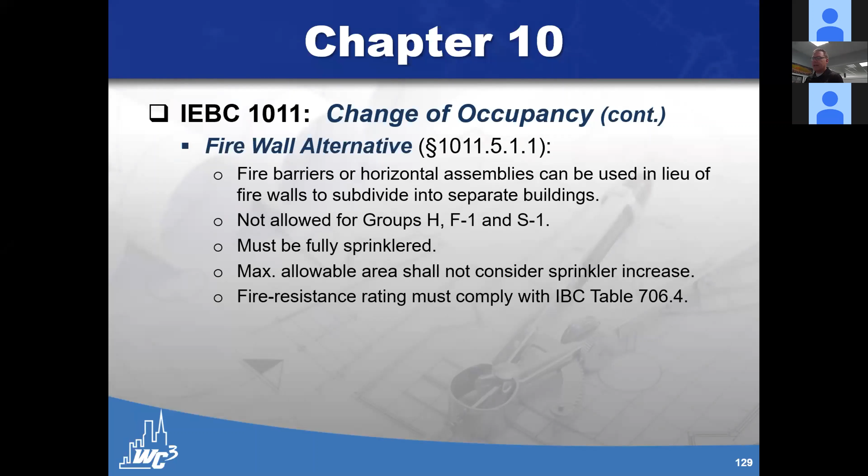Okay, enclosure of vertical shafts. You need to make sure you're complying with the IBC requirements in relation to vertical shafts. If we've gone to a higher hazard category, all stairways and other vertical shafts have to comply with the IBC. The IEBC does have some exceptions, but in general we're going to be dealing with Chapter 7 of the IBC there. And then openings that go into shafts shall be protected by assemblies having a 1-hour rating and have self-closing, if that applies, such as your laundry chutes or trash chutes.

Okay, another question. So we have the historic building code, the existing building code, and the building code. Do they work together, or is there some system of determining which one applies in case of conflict?

No, thank you for the question. And I apologize, I was asked to talk about the IEBC, so I didn't look to see if the state of Nevada had a historic building code. Most states do not, and the way most states handle historic buildings is based on the IEBC, the existing building code. So if the state of Nevada does have a historic building code, you are going to need to comply with that for the historic building portion.

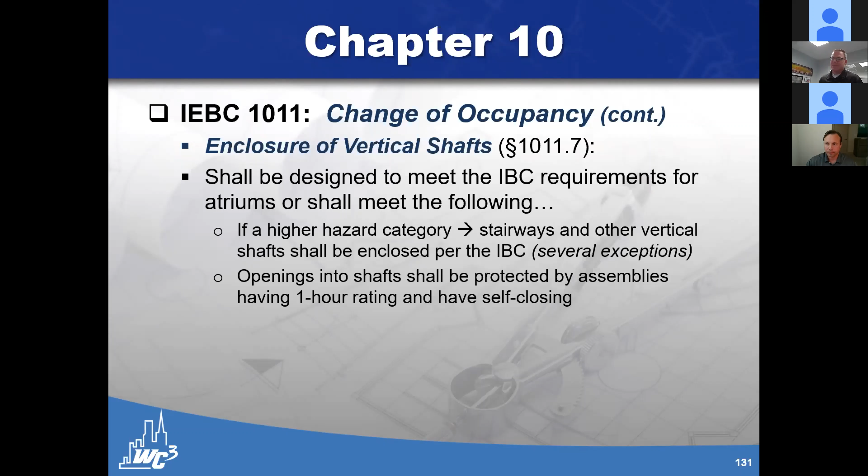So hopefully that's helpful. I would think the Department of Interior guidelines are probably only going to be involved for national or state historic buildings, whereas if you're in a local historic district or something like that, maybe it wouldn't fall under theirs and would fall under the existing building code. I'm not sure, hopefully it was helpful. There's a lot of homework on your end to figure that out, sorry.

Okay, additions. This is chapter 11, again we're still in the work area path, following that, which is the majority of the IEBC. Any addition cannot create, extend, or increase a nonconformity in relation to accessibility, structural strength, fire safety, means of egress, or capacity of existing mechanical, electrical, plumbing systems.

You cannot increase the height or allowable area above what's allowed by Chapter 5 of the IBC. If the addition increases the fire area, any existing fire protection systems must be shown to comply with Chapter 9 of the IBC. You can't just necessarily extend one; you now need a full analysis of that system and show it's in compliance with current requirements.

That's pretty well covered, there's a lot of other stuff in there. I'm just trying not to duplicate things from the prescriptive path and the work area path. Chapter 12 is the last chapter on the work area path, and it addresses historic buildings.

I mentioned this earlier, that if you're following the work area path and dealing with a historic building, they actually require an evaluation report. I want to highlight some of the things noted in this report. You have to identify each required safety feature that is in compliance, and know what items are not in compliance and how that might damage the contributing historic features of the building. If you're in a high seismic region, seismic design category D or above, you need to describe whether there's a complete load path.

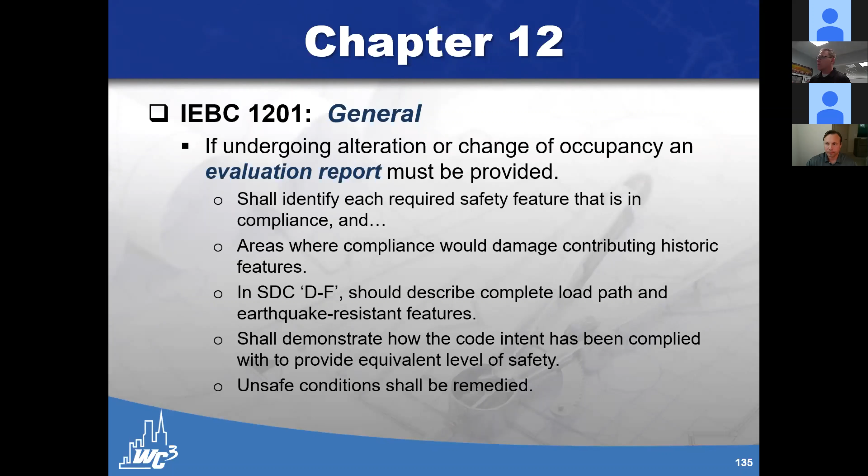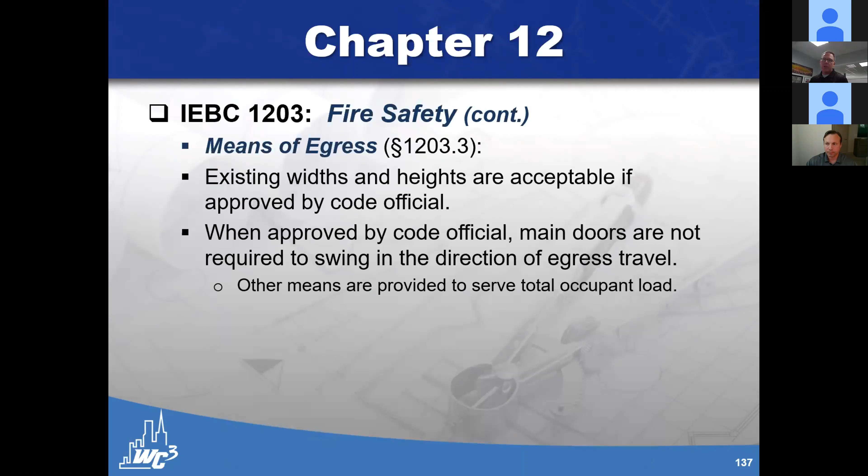Means of egress: the existing widths and heights are acceptable in the historic building if it's allowed by the code official. The main doors, if they are not required to swing in the direction of egress travel, but you need to have another door, another means to provide egress for the total occupant load for that building that will swing in the direction of egress travel.

There are a lot of giveaways that they give you for historic buildings in the existing building code: interior finishes, stairway enclosures, when you have to have 1 hour fire resistance, glazing, stairway railings and guards, exit signs. A lot of those things are giveaways in there.

Okay, so we finished talking about repairs, and then we did the first two paths for compliance with the IEBC. One was prescriptive, one was work area. The last one is our performance method, and this is by far the least used and the hardest to show compliance. So I'm going to do a few slides to kind of show you how it works.

It really is only when we're dealing with alterations, additions, and change of use. You cannot use this for group H, I1, I3, or I4. It deals mainly with fire and life safety issues. You can't really have any unsafe conditions; you have to make sure those are all addressed otherwise.

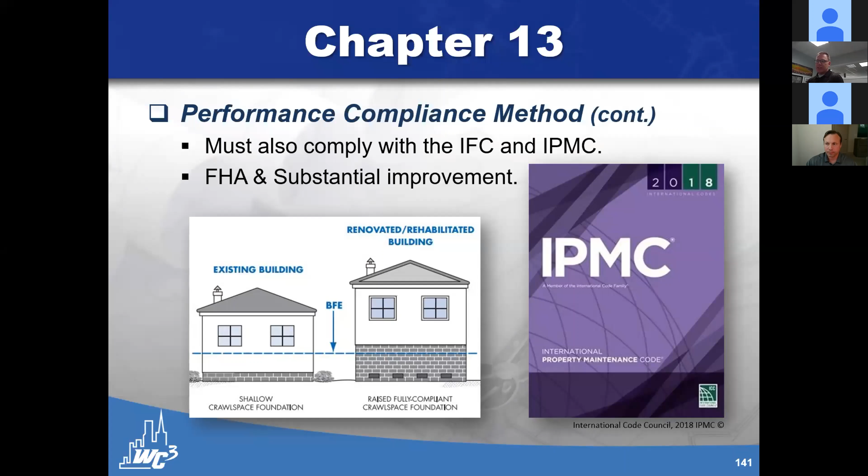When you're using the performance method, the building has to comply with the fire code and the property maintenance code. If you're in a flood hazard area and substantial improvement is occurring, you need to make sure you're raising it. It really does not address the structural requirements at all.

And so separate from meeting the performance criteria, which I'll go over in a little bit, you need to provide a separate structural analysis showing that the building fully complies with the structural requirements of the IBC for a new building. So it has to meet all dead, live load, snow, wind, seismic, all of that.

Okay, now the performance criteria. There are 3 - they have to give you the structural analysis, but then there's three main things that you're involved with, as the architect and the design professional and responsible charge. You have to check all the fire safety features within that building, all the means of egress features, and then other general safety features.

And what they do is - this is just an example table, and there's a ton of tables like this in Chapter 13 of the IEBC. So this is one of our fire safety features, which is separation. Do we actually have occupancy separations between them? And if you have one of these occupancies, but there are separations, then you come here and you figure out what values are you given.

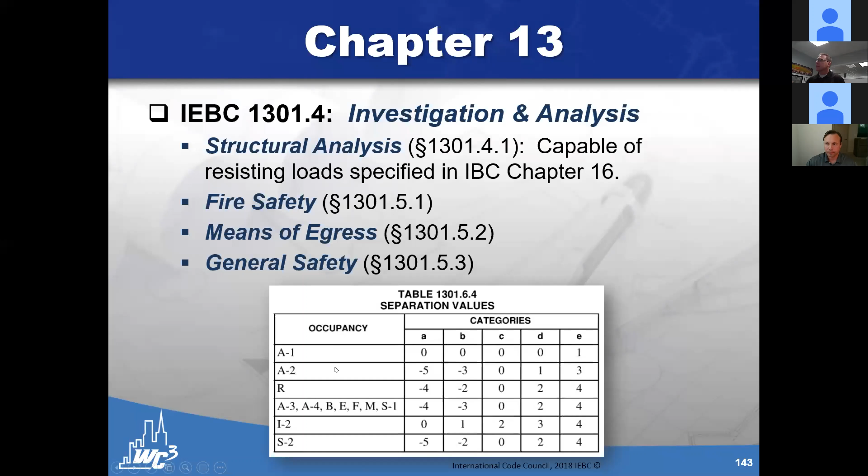And then you're going to take from all those different tables - so where's that separation one we had? Is it right here? Right here. So we put all of those values here in this table, and we try to determine whether or not this building is going to comply. And we put in the fire safety, the means of egress, general safety, and if it's these asterisks, that means you don't apply a score there. You sum up your scores at the bottom.

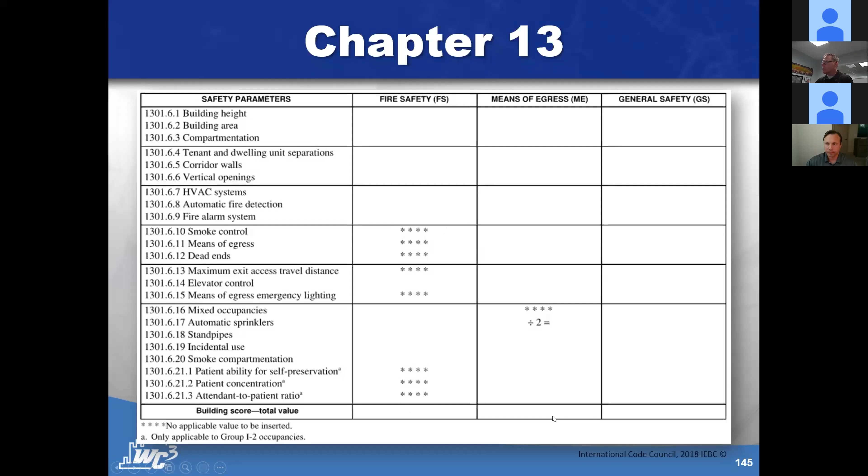I haven't - so in the existing building code handbook that I wrote, I have an example. It walks through all the tables, how you do it, how you fill it out. And it has a table of a relatively recently constructed building and how this was all filled out. And while we were able to get a couple of the scores to meet, one of them we weren't able to meet. On top of that, you have to make sure that the full structural system is fully compliant with current code requirements. You have to verify that the fire code is being met.

You have to verify the property maintenance code is being met. You have to make sure that if it's a substantial improvement you're doing, you're raising the building up above the base flood elevation if you're in a flood hazard area. There's a lot of limitations on the performance method, so I want to make sure you're aware of how it works. There's all these tables, you get scores, you fill them in this chart, and then you sum the scores up and make sure they're exceeding the minimum scores.

Relocated structures. We actually got towards the end of this. I love this, I think I've gone too fast, so I apologize. One thing that's really tough with these virtual ones is not being able to have a lot of back and forth and commentary. Usually I have several more slides, and we actually spend a full day going through lots of different examples on this.

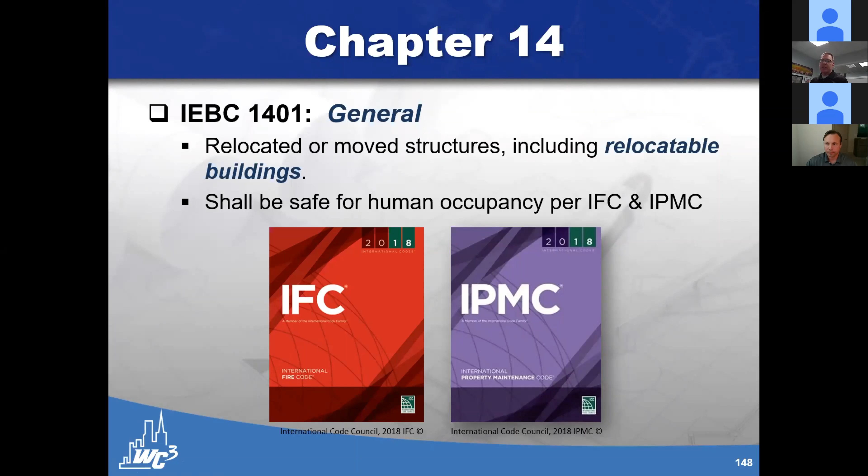So we're dealing with anytime we're relocating or moving a structure, including relocatable buildings, which the definition is in chapter 2 of the IEBC. Those are buildings that were constructed with the intent of moving them throughout their lifetime. In addition to the provisions in chapter 14, we have to make sure they're safe for human occupancy, as outlined in the fire code and the property maintenance code. In general, with the fire code, you're dealing with chapter 11, which is the existing building requirements.

So what are the specific requirements for relocating or moving a building? It has to be located on the lot per the requirements of the IBC or the IRC. The foundation system and the connections have to comply with the IBC or the IRC. Wind loads have to comply with current code requirements, seismic current code requirements, snow current code requirements, flood hazard areas - if you're within them, you need to make sure they're located above the base flood elevation. Inspections - you might need to require inspections at the end to make sure no repairs or whatnot are required.

So let me give you an example. I got a call from a building official once. The jurisdiction was moving their airport from one location to another - it's a publicly owned airport. The mayor of this jurisdiction had told all the owners of the hangars that they could move the hangars over without any evaluations of those buildings or anything like that, and they wouldn't have to pull a permit. So the building official was very concerned about this.

One thing we were able to at least help with is they were moving it in the same location - same city, same jurisdiction. The wind loads didn't increase, the seismic loads didn't increase by more than 10%, the snow loads didn't increase by more than 5%. Because those didn't increase, they didn't really have to provide an evaluation of the building. But the building official still did, and got agreements with the mayor, require them to design the footings and foundations for the current code and how they were to anchor the building to it based on these provisions.